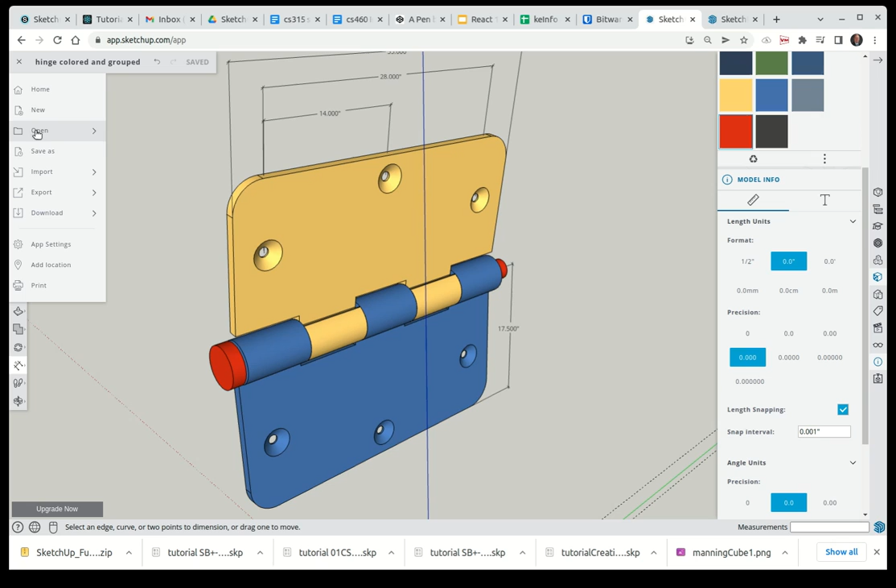So let's get started, I'm going to start completely from scratch. So, new, and I'm going to set my dimensions to be inches, precision of, let's go 3 decimal places, although I'm going to snap it at tenths of an inch. Does that sound right? Yeah, I think we can snap it at 1/10 of an inch. So it's not going to be perfect in English units, but tenths of an inch are easier to snap. I actually tried to snap to 1/32 of an inch, and it doesn't like that. Okay, so we have our units set.

I guess I can leave that open. Alright, we can get rid of our friend here. And let's draw the base using the rectangle tool. I can type R, I'll start at 0, and since I'm going to go tenths, I'm going to make it - and because of the way the accuracies of curves and things are going, I'm going to actually scale it up by tenths. I'm going to go 10/10 of an inch wide by 350 long.

Now I'm going to create the curve of the inner side of the hinge by first drawing a line, L, start there, and it's going to be - well, you know, the total width of the hinge as it's open is going to be 3.5 inches. So that would mean this height is going to be 1.5 inches, yeah, and then the round part of the hinge with a pin will be another 1/2 inch taking that up. So 150 high. Zoom out a bit.

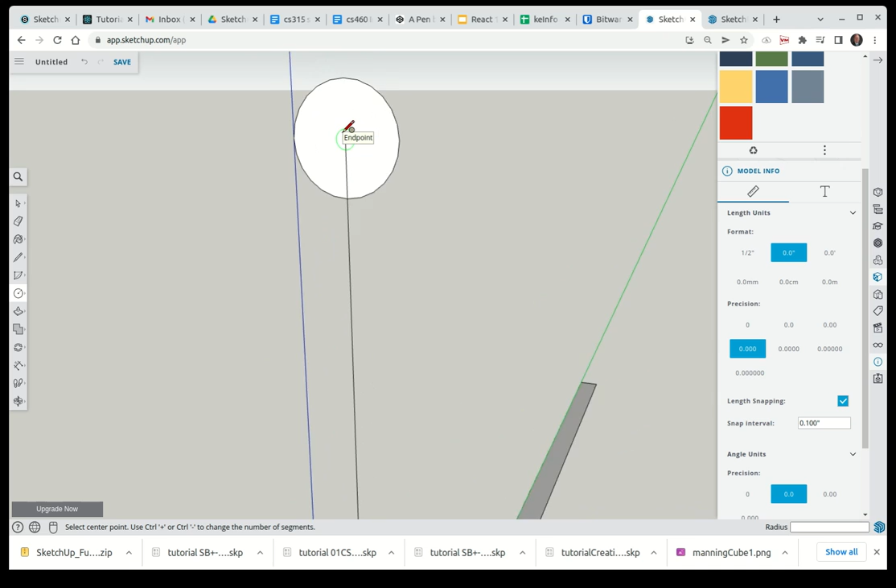Let's see, which of these lines should I erase? Now I want to follow a line. I'm going to go ahead and erase this line now because I don't need that center. I'll come back later, I'll need that center to create the pin.

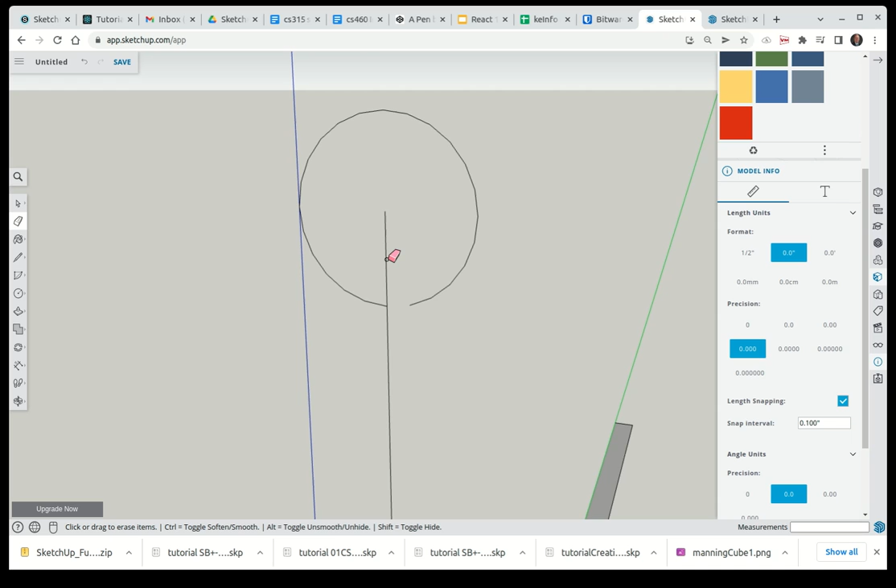But I don't like that curve right here, so I'm going to zoom in on that. I want to create a curve between these two lines to make it a little smoother. So let's go to the arc tool. Notice there's multiple ways to make an arc.

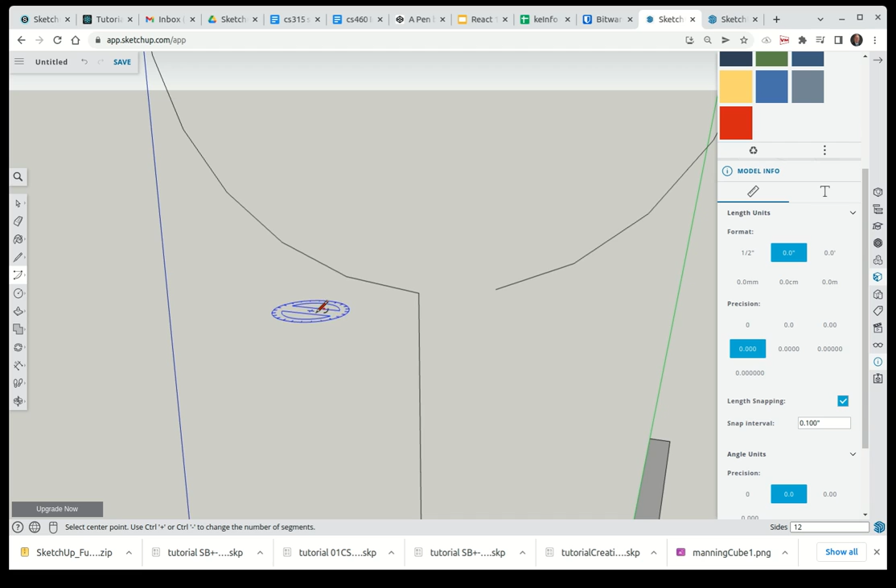I'm going to try the simplest way. Let's try that, what should I do? Let's try that, and then come down to here and along that edge. Oh, it didn't work out, let's try that again. Am I doing the right one? I think maybe let's try that one instead. There we go, that's the one I want.

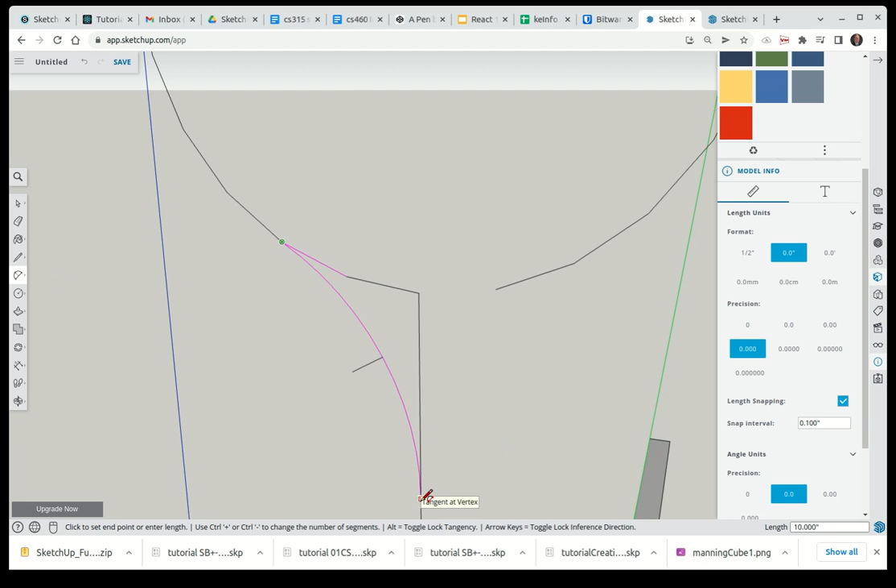Right there, see how I get a tangent at the vertex? I'd like a tangent at the vertex. Click. Now, if I hadn't scaled this up, it would not have allowed me to do that.

So I'm going to hit my eraser tool and get rid of these. This is going to be the line that my face will follow.

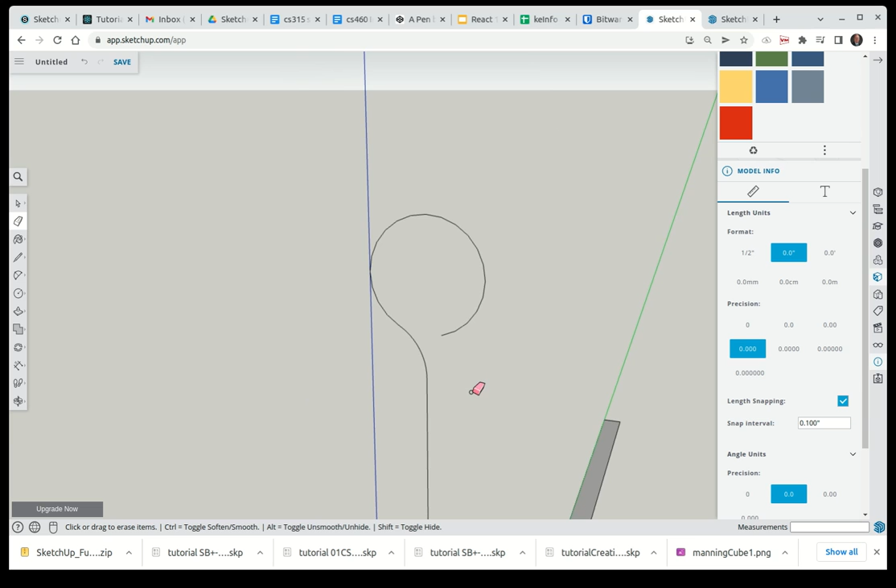Now I just realized that, like I told you at the start, I want to make pieces. This is going to be 350 long initially, but I want to make this only 70 long initially because there's 5 sections to make it 3.5 inches. So 70 times 5 sections will get 350 total. I'm going to follow this line with this face, but let's adjust that face here.

See if I can do this. Actually, let's just redraw that rectangle, it's easier. I'm just going to erase that rectangle. Let's do the selection tool, and then let's just erase that.

And let's just redraw a 10 by 70 rectangle. Don't need extra lines laying around. So let's do a rectangle. Start there, make it 10, 70, not 350... 70.

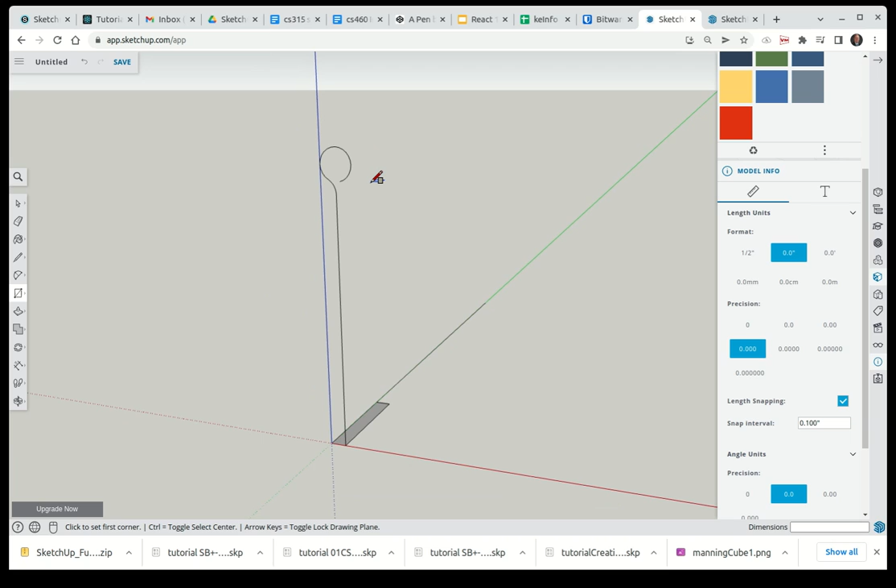Okay, now let's follow that face. This will become one section of our hinge, using the Follow Me tool. Wonderful, powerful tool, I hit F.

Oh, but that section is offset. I want the Follow Me. Select this face and drag up the line. Continue dragging, and look at that, we have a lovely Followed Me along that curve.

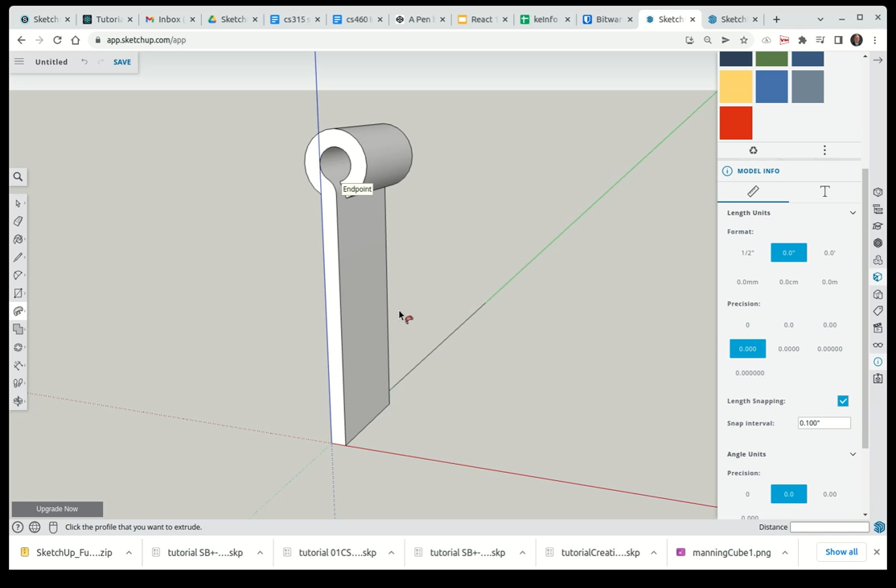Now that looks pretty good, but since we're going to be duplicating this piece, we can spend time on this piece. Let's fancy this up a bit, let's round this corner a bit.

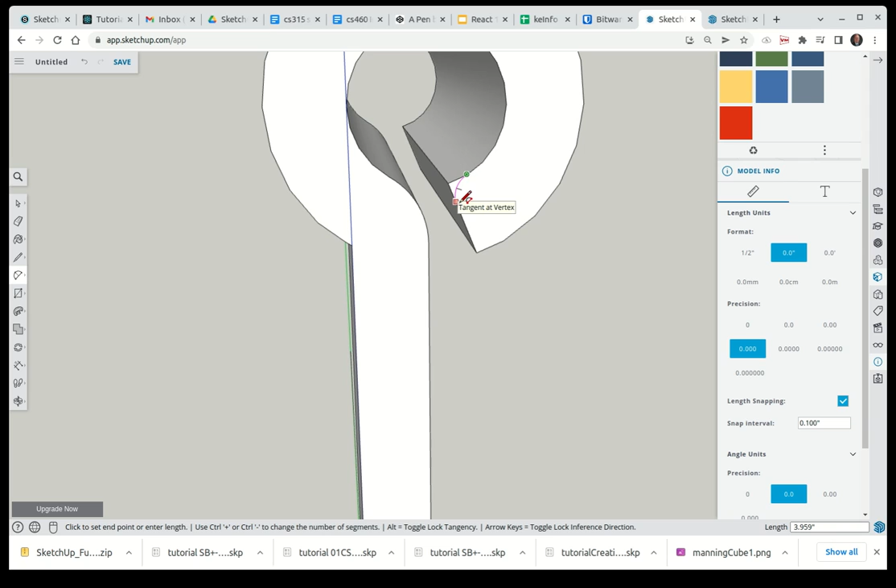Let's do that same arc tool, and let's do a little bit of an arc here. There, see when it turns purple, I have a nice tangent. Now let's push this face to the other side. Push anywhere in that other edge point, and done.

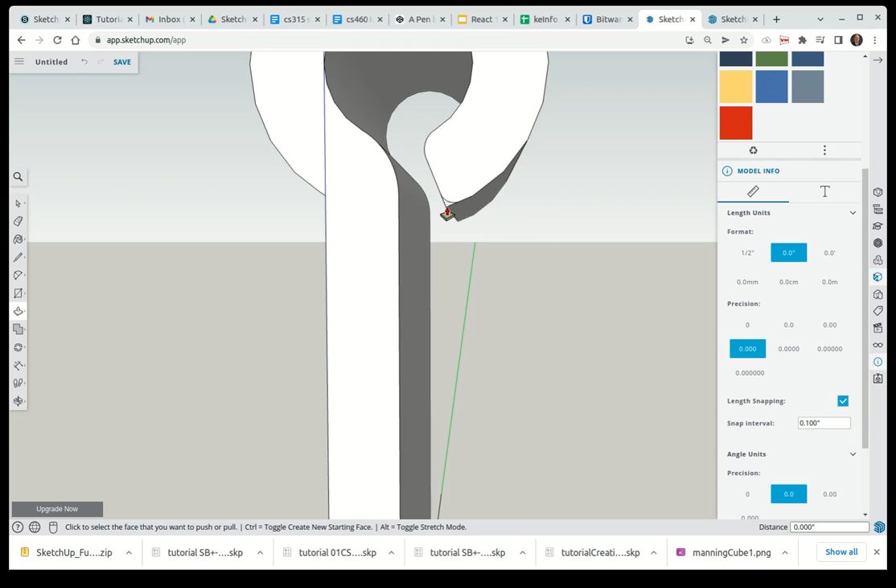Nicely rounded, let's do the same thing on that. First, draw an arc. Select that, that's a nice endpoint there. Now wait till I get to purple, snap to the tangent. Oops. Click. And push that face all the way to the other end. There.

They're a little nicer looking now. I could chamfer other edges, but we'll worry about that later. So now I have a piece of a hinge that I'm going to be duplicating and then drilling holes in.

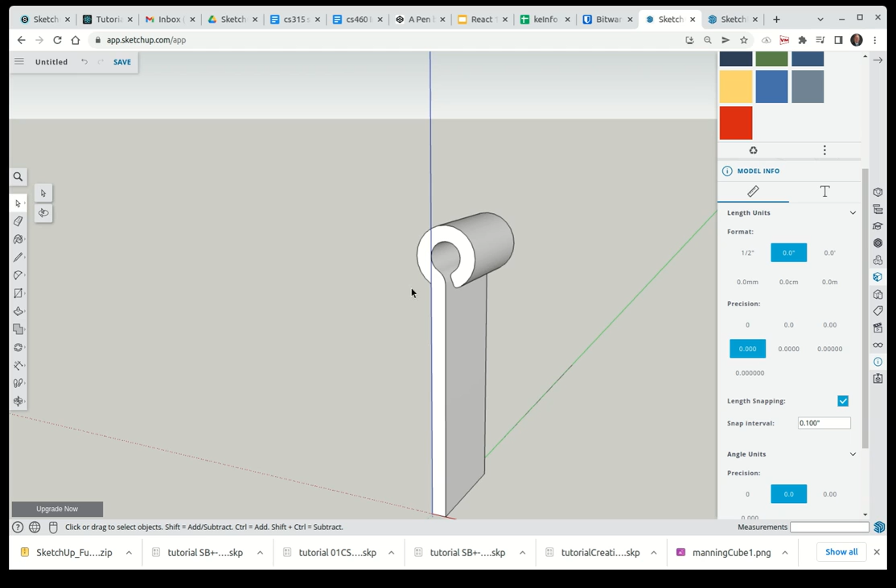Now, the best thing to do now is to select, triple click select, and group it.

Uh-oh, there's a line in there that I don't want. I'm going to zoom in and get rid of it, and it will reduce the size of my object here. I can triple click, yeah, there's that extra line hanging around. I can delete that line. There we go, now my group is a reduced size.

I can always come back here and adjust this just by double clicking on it, and make adjustments to this specific group. I could also make this a component, and wherever that component appears, if I ever edit it, that component will be changed everywhere.

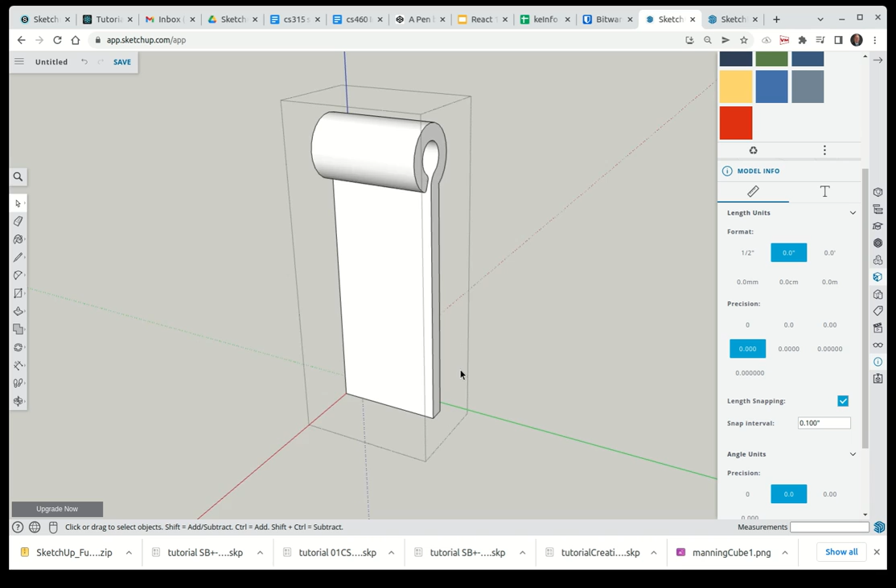Now eventually this one is going to want to have a rounded edge, but the other ones aren't, so I'm not going to round the edge or drill any holes yet. I'm going to get my hinge pieces all produced.

So I'll unclick that. Now what I want to do is duplicate this. If I move it down 70, it'll be just connected to this one. I want to move it down another 70.

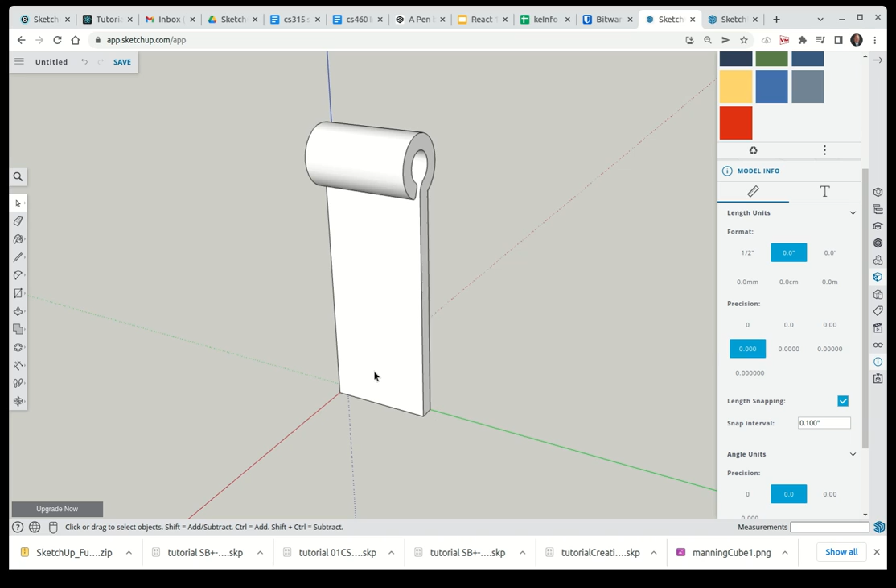To 140. So I select it as a group, type move, and pick the point—since I know the direction, it doesn't matter which point, but I make a habit of selecting corners when moving. Now as I move it, it automatically wants to follow along the edge.

But if I want to duplicate rather than move it, I hit the Control key. Now I'm moving it, and see how it's following the green axis? I like that. I could lock it to the green axis, or just be happy it's following now.

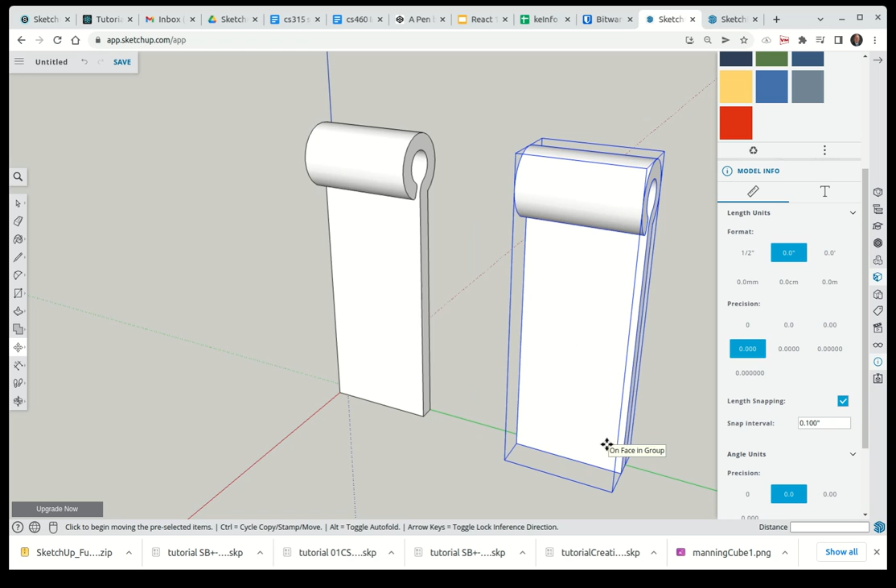I can type 140 to be the distance it moves. Now I'm going to make another move on this one just to practice. Click, start down this direction, Control key so it's a duplicate, and another 140. And that's the other end of this hinge.

We're going to fill these in very easily later, after drilling holes and things in this one.

Now let's get the other section of our hinge. I guess we can offset it this way so we can be duplicating those other parts as well, and then we'll rotate it. So let's go ahead and make the other section.

I'll go ahead and select this one. Oh, I don't want that one. Escape. Let's select this one, move that corner, and Control.

This is going to eventually be rotated around for the top. Actually, we're going to flip it 180 degrees for the other side of the hinge. So I'll move it out far enough so it doesn't get in my way. Click.

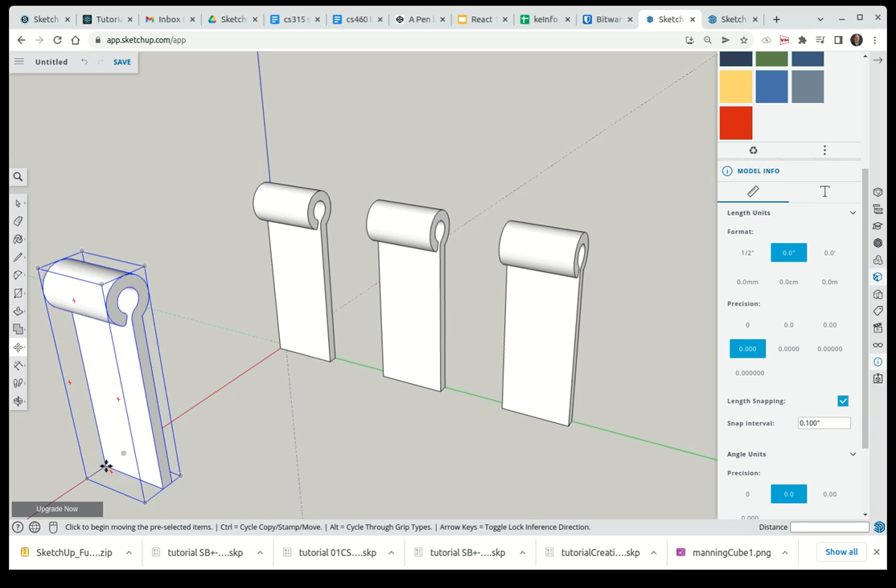And now let's move this one again, this direction, 70. Okay, so that's the other hinge.

We're going to also rotate this. Let's go ahead and rotate it now, and then we'll match this.

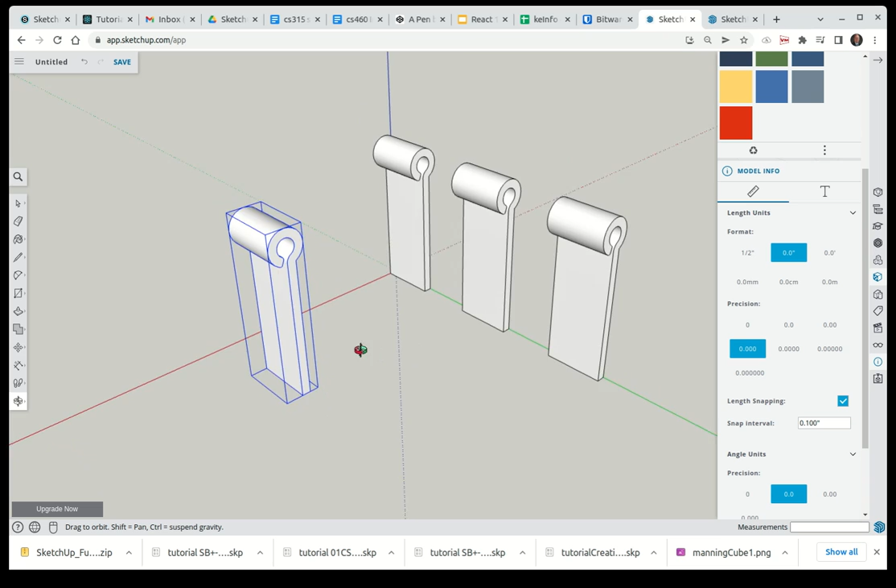Let's see. Now to rotate it, I want to be careful because I want to rotate it on the midpoint of the bottom part of this, so it actually will still fit when I slide it back over there. So let's go ahead and rotate this using the Q key.

The rotation point is going to be that midpoint, but I want to make sure I'm choosing the right plane first. So let's lock it—here we go, up arrow key locks it to that plane of rotation. I want to choose that midpoint on that face to be the rotation point.

Click. This is my initial angle, and now click again to have rotated 180 degrees exactly on the midpoint. Now I can move this guy over, and it'll be matching that space there.

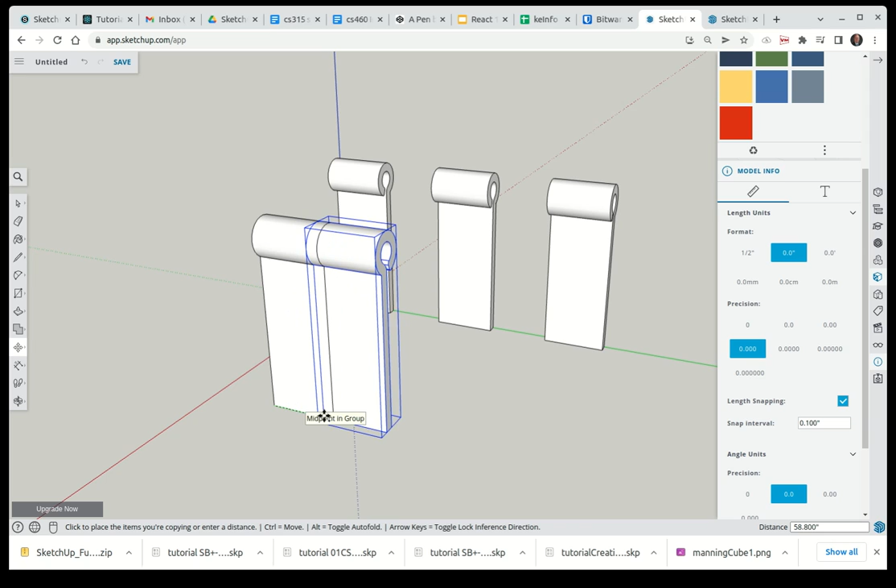So let's do another move. M, click that point, come this direction, Control key to duplicate, and it's going to move 140. There we go. Now I have the matching face of the hinge.

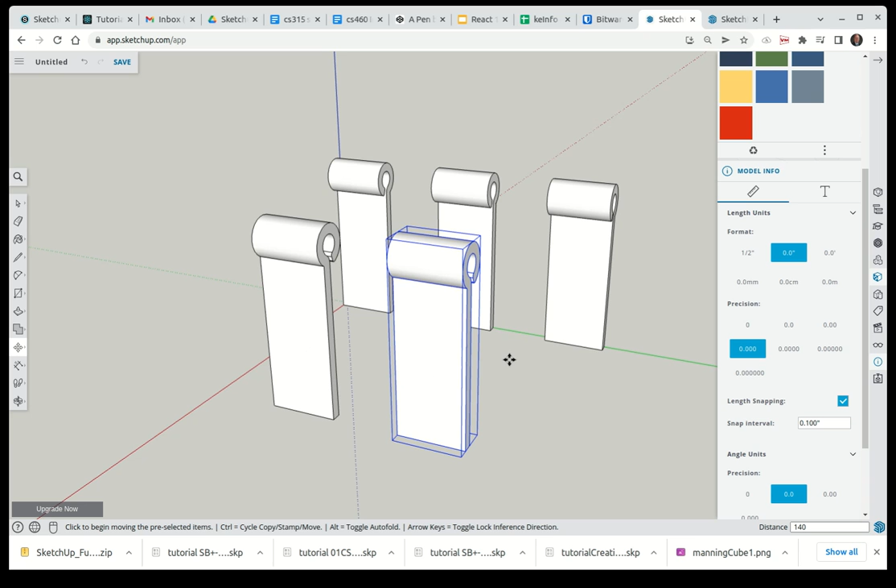Now I can easily come and fill the other remaining parts in. On this side, I will need to be drilling holes in them. On this side, there are no holes needed to be drilled. But let's drill our holes now in these parts.

Now, in order to drill holes, I have looked at hinges, and I've seen that they do need a little bit of clearance, and I might as well draw a line there. Do I have any reference points for a line?

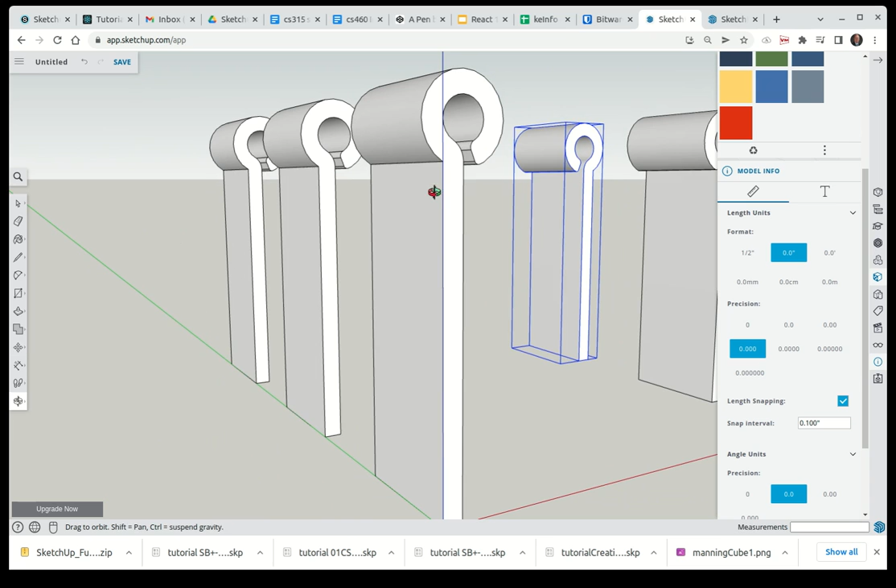I don't want to draw a line across there. I guess I'm just going to have to pick a line to draw across. That'll become my reference line, and I need to make sure it follows all of them. So let's go ahead and draw a line, and let's pick some reasonable clearance.

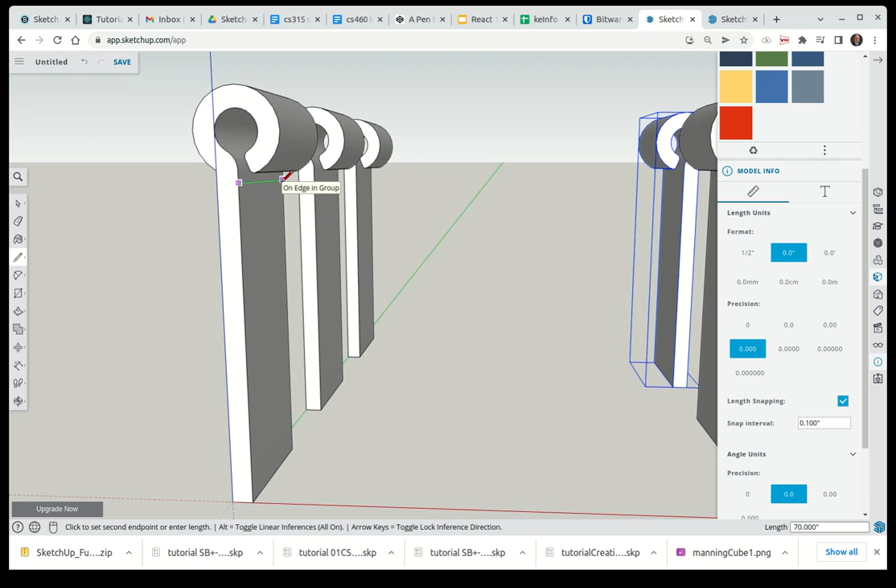About there is probably pretty good, and it automatically wants to follow the green axis. Snap there. Now I want a midpoint reference, L, and come down here. This is just a reference line I'll be deleting later. This will be my reference point for my holes drilled.

Now I realize the hole is going to be in the same location as this one over here, so I'm going to get the hole drilled in this one and then duplicate this. I'll be deleting this guy.

So now what I need to do is have a reference for where the hole is here. It's going to be 3/4 of the way here. So let's select this line and divide it into 4 sections and type 4.

Now you can't tell, but if I hover along there, I'll see when I go to draw a circle, it will discover there's an endpoint there. Now this is where I was making the circles too small. I'm going to make the main inner drill hole.

Let's make it... it looks like about 10 tenths of an inch. Does that sound right? That looks about right. Let's go 10.

Okay, that's the hole. Now this guy here, I need a similar guide to be basically centered. Oh, I did that wrong. This one is 3/4 inch down. This one is in the center. There's a... and at 10. That's that hole. This one needs to be 3/4 inch down.

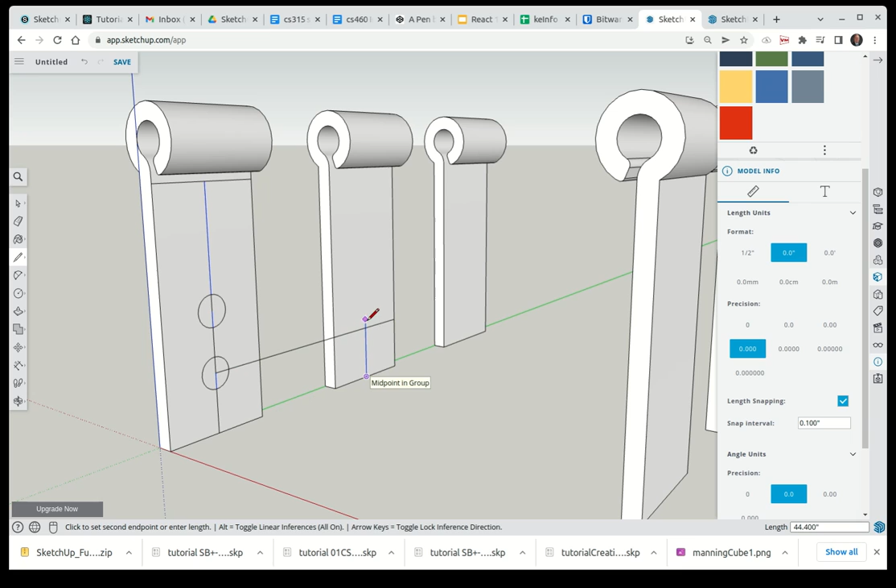So let's go ahead and draw another reference line across here. And let's see, I need another reference line from the midpoint up to there. That'll be my center for that hole. This one is out, this one is halfway. So let's do that circle.

C out at 10. Okay, now let's get rid of the extra lines, and then we'll push that through, and we'll also countersink it. So stop drawing lines. Let's go ahead and select and start erasing some extra lines.

So I forgot, this one doesn't need to be here. Let's erase lines first. Then when we erase the circle, it'll be one click. Oops, didn't mean to do that. Just the line, erase some reference lines.

If you don't erase the reference lines, when you push a circle, your circle will actually have sections, and I don't like sections.

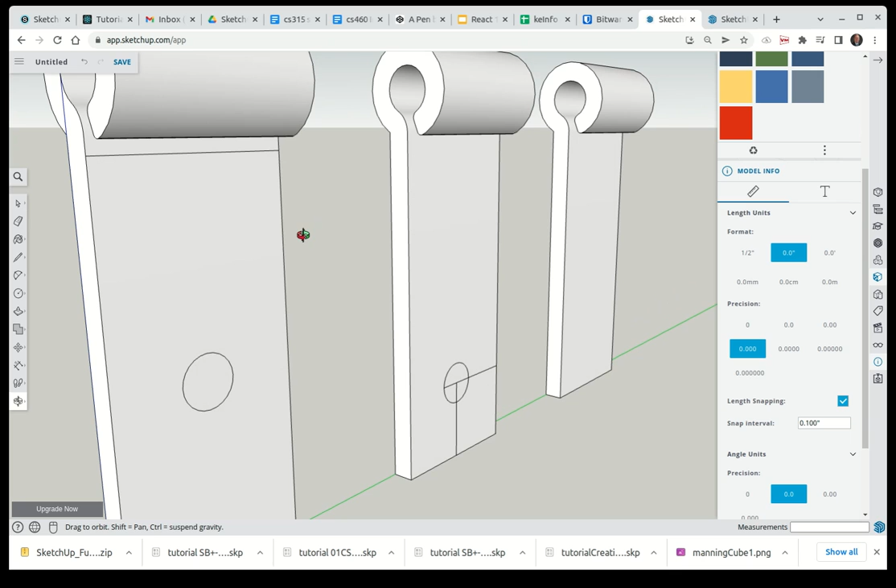I'm on the group. I'll leave that line there for now, because I'm going to be pulling that section in between. Alright, let's go ahead and delete the lines first, and then we'll drill the circle. Drill the hole.

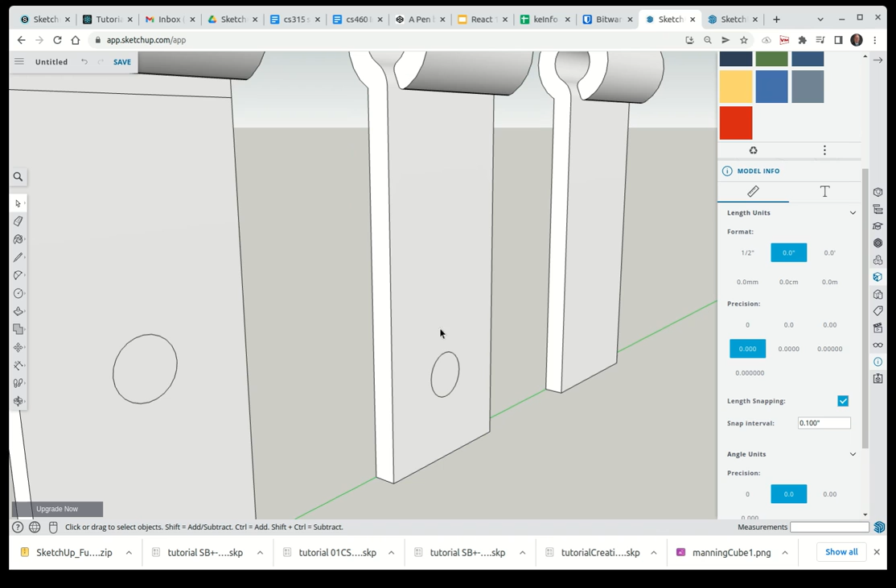Okay, so we're here. We want this to be a hole drilled in this object. But remember, this is an object. I'm going to explode that. Now, when I push this circle through, then I will regroup this into its own group, just because I like groups. It doesn't have to be a group now.

But remember, this is 10 across. I don't want it to go exactly 10 if I'm going to countersink. So I'm going to actually push this twice. I'm going to click, and push it in this direction.

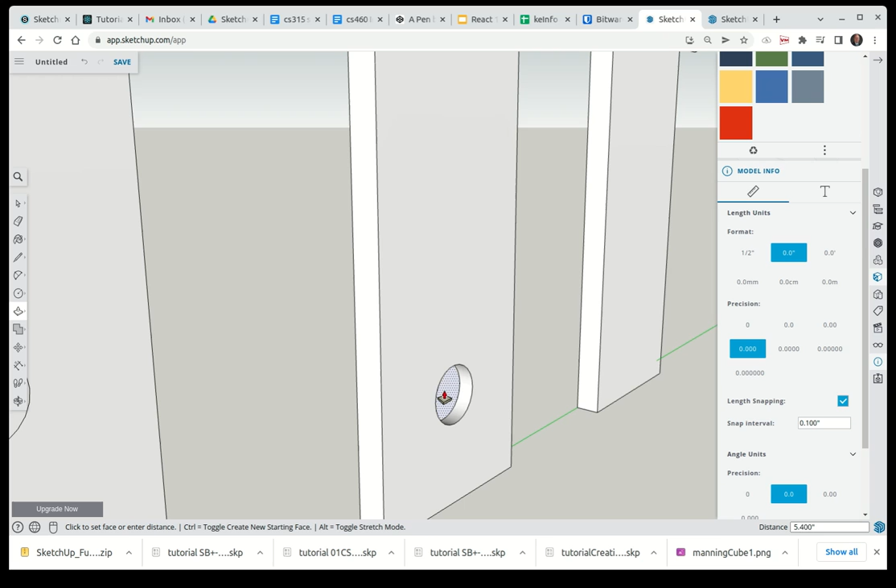Let's go 8. And now I'm going to push it the rest of the way. There's another 2 left. But I'm going to control and push, so it actually pushes a new surface, because this is going to be the reference point for the end of the countersink.

So I'll push that direction 2 this time. And now if I rotate around, I should see how the hole went all the way to the other end. And the advantage here is now I can delete that face, and now I have a hole, but I have an extra reference point.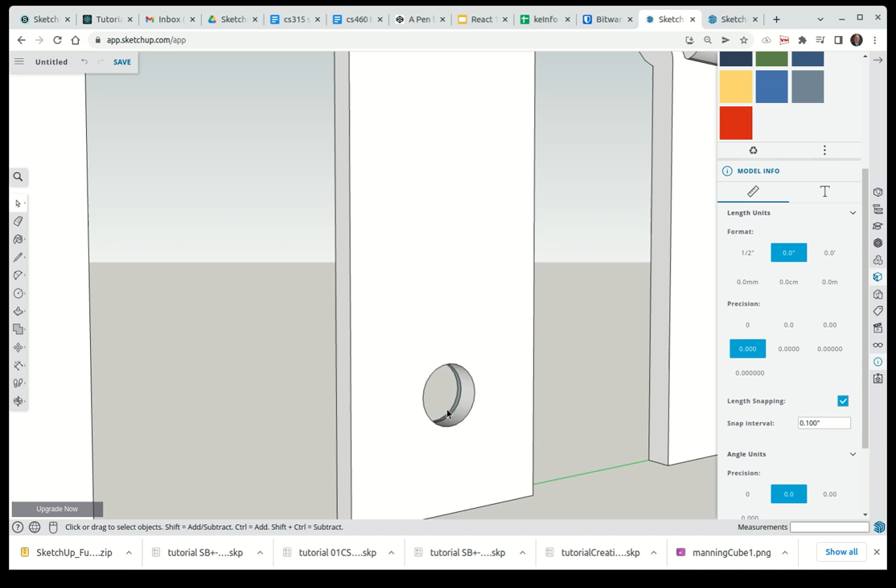It's 2/10, or 0.2 tenths in the final thing. Now what I want to do is countersink this. So what I want to do is actually scale this circle, right? Not that face. I want to scale that circle, but I want it scaled around the center.

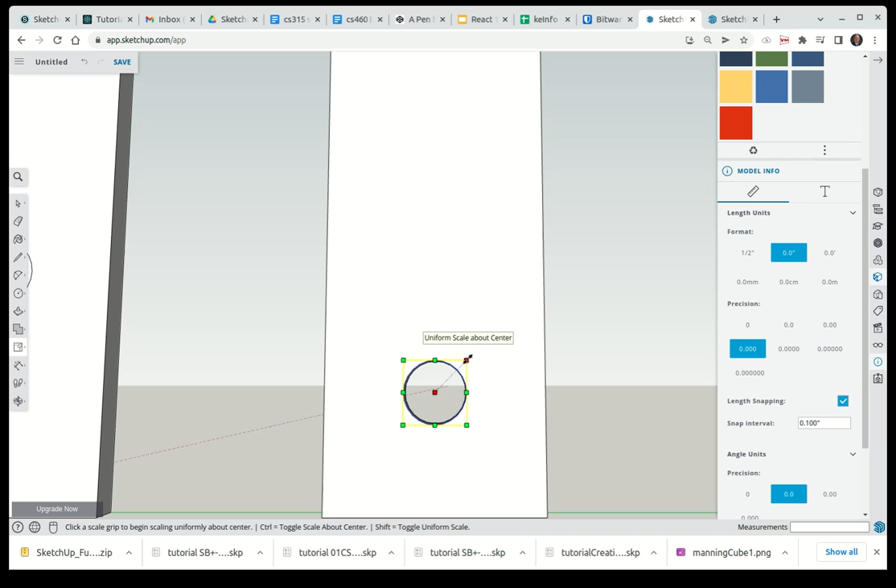Control key now makes the scaling choose to scale around the center, and watch what happens as I click and scale this. Now it's hard to tell when I'm at 45 degrees, but we can estimate that looks like it's snapping to what seems like a good 45 degrees. So I'm going to stop right there. Now let's see, that looks pretty well countersunk. Let's do that again over here on this one.

First, I'm going to push this face. Oh, wait a minute, I haven't exploded this group. Forgot to explode. Let's make sure we do our explode.

Now let's push that face this direction, 8. And now push it another 2. Oh, and see, since I didn't do the plus, it's not leaving one behind. So let's hit Control and push it another 2 in that direction.

Now we can start deleting faces by selecting, and I should see that extra edge there. Very important to have that extra edge.

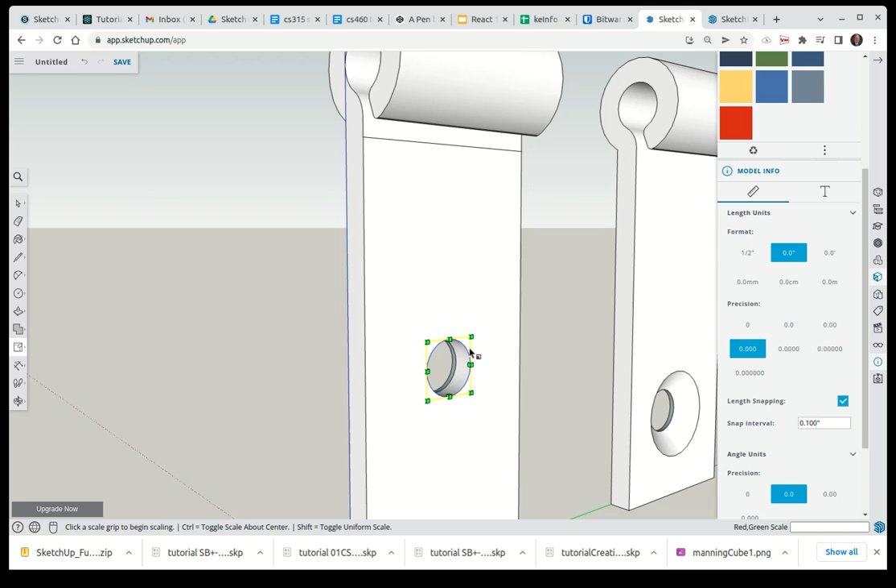Now let's select that circle and do a scale S, Control to center the scaling, and drag the corner out. Look at that, it snaps nicely what looks like the 45-degree countersink.

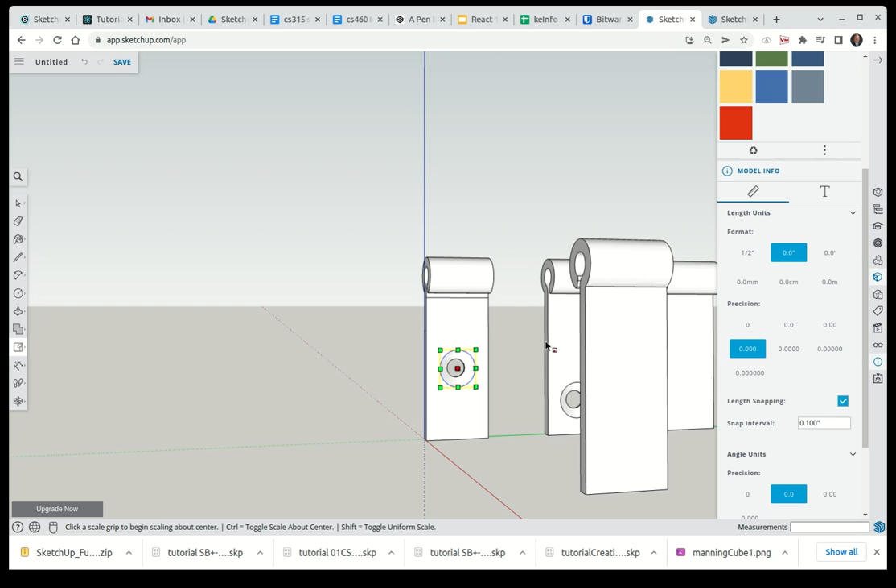Now this piece here, if I flip it, is what I want over here. So let's go ahead and see if I can duplicate that piece to fill it here. Then I will have saved me time from having to drill another hole. Let's see if we can do that.

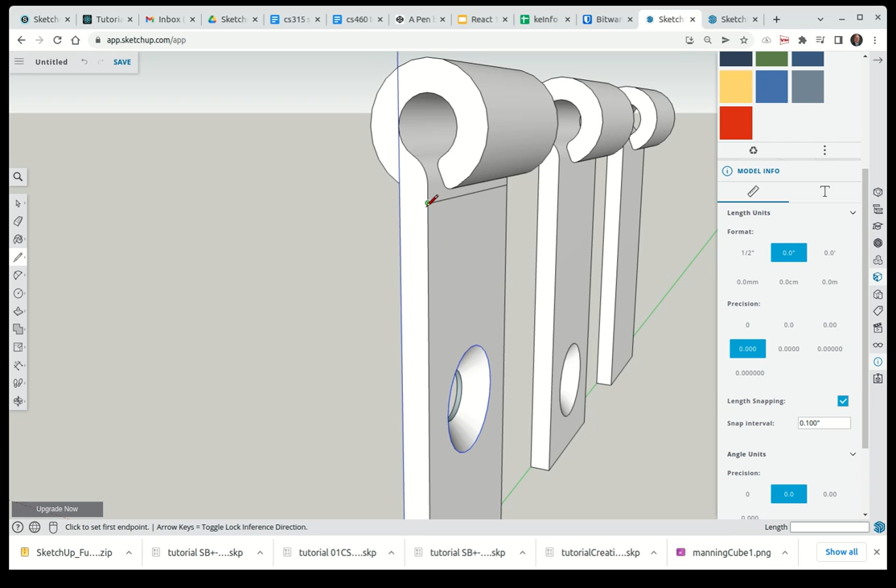In order to break this thing up, remember I've exploded it. To break this up into two parts, this be one part and this be another part I can duplicate. Let's go ahead and draw lines around there, or I could do a rectangle. Let's do lines.

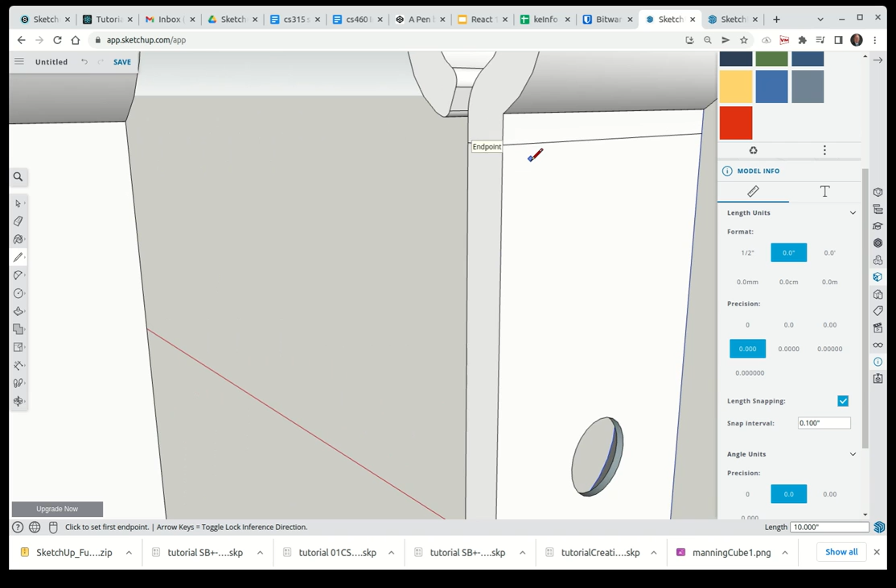Now let's see if I can select this, and let's make that a group, because this will be handy to put over here. This whole thing will be duplicated over to there, and then this piece I can put to the other side of the hinge and rotate it. Let's see if I can do that.

First of all, select. Let's try. Let's see here, if I do this just right, I should get that piece selected and see if I can make it a group. Look at that. Let's go ahead and group that.

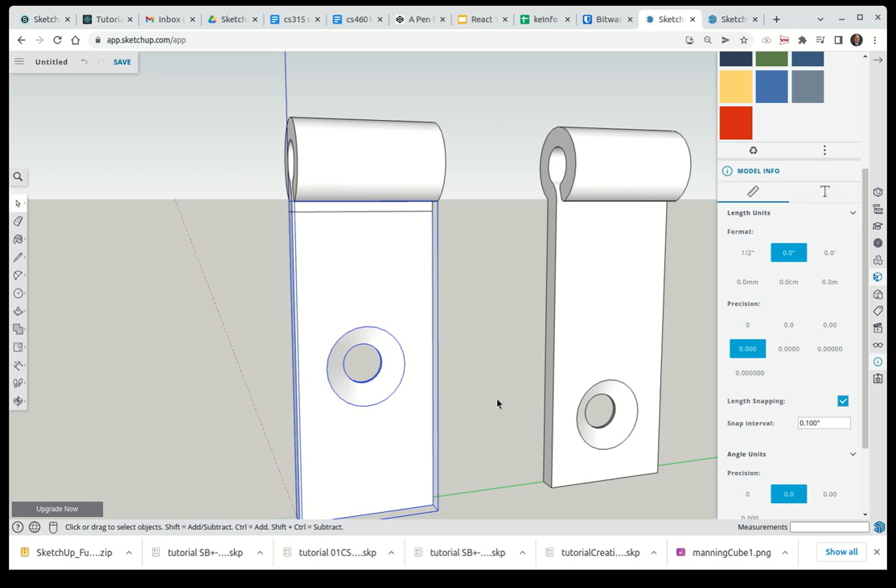And now, let's see, did it do the right thing? Let's see what happens. I may have grabbed too much. Let's try that again. Let's go back and explode that.

Let's try grouping just the right stuff here. Try that. Let's group that. Group. That looks a little better. Oh, that's the reference line. That had me fooled. Alright, so let's go ahead and move that over here.

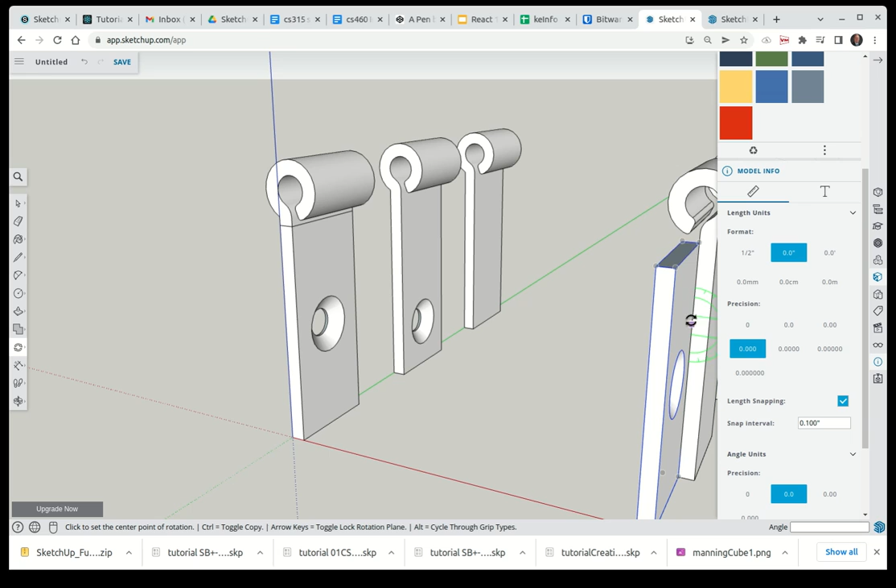And then we'll flip it. So let's do M. Click that corner right there. Control key, so I'm making a duplicate of it, and have it jump right there. And now we're going to rotate this guy. Let's do a Q on the midpoint right there, along that x-axis, and look at that. I've got that end ready to go.

Now I can move this down to here. Let's go ahead and do another move, and we'll select this corner, and this is a good time, Control, because I want that corner to match exactly there. Look at that. I've got that piece there.

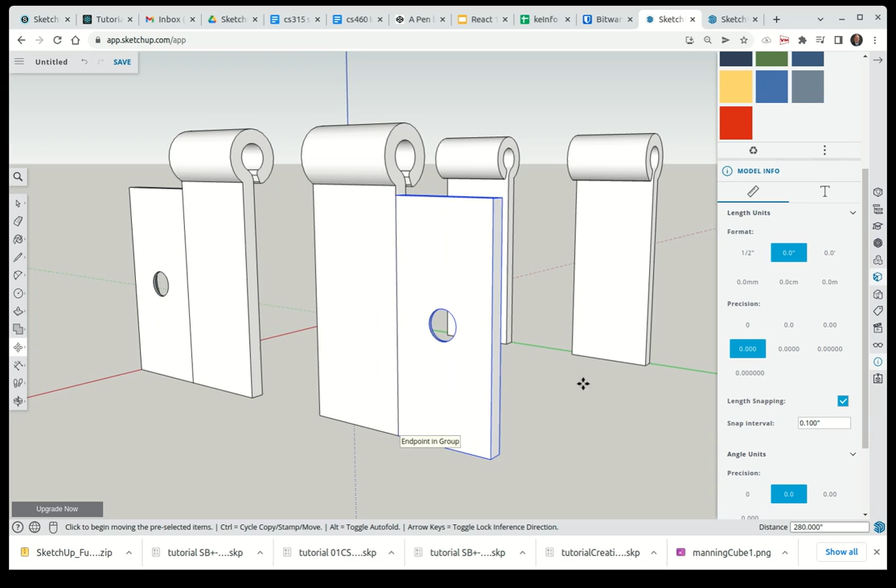Alright, now I'm just about done. I think I'll just move that and remove the hole. It's easy to remove a hole. Watch how easy this is. Select that M, select that corner, Control key, match that endpoint.

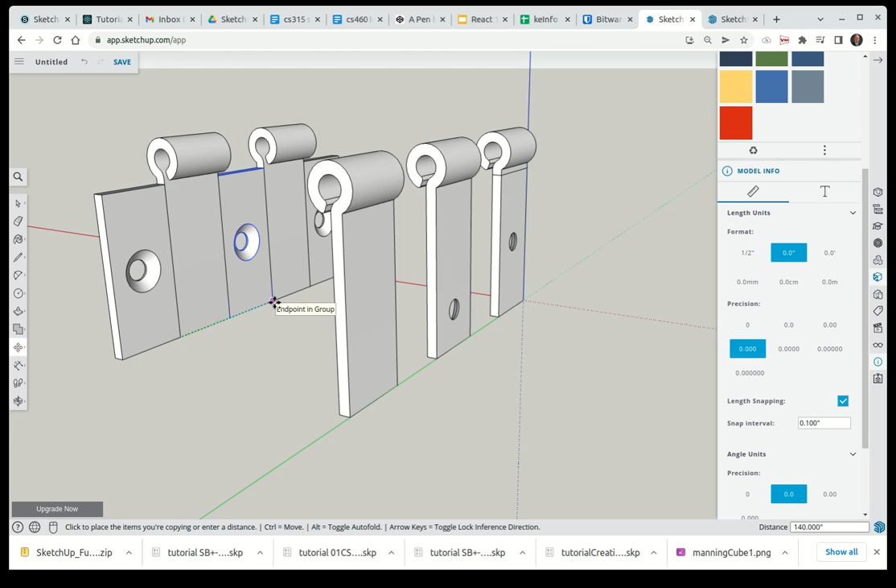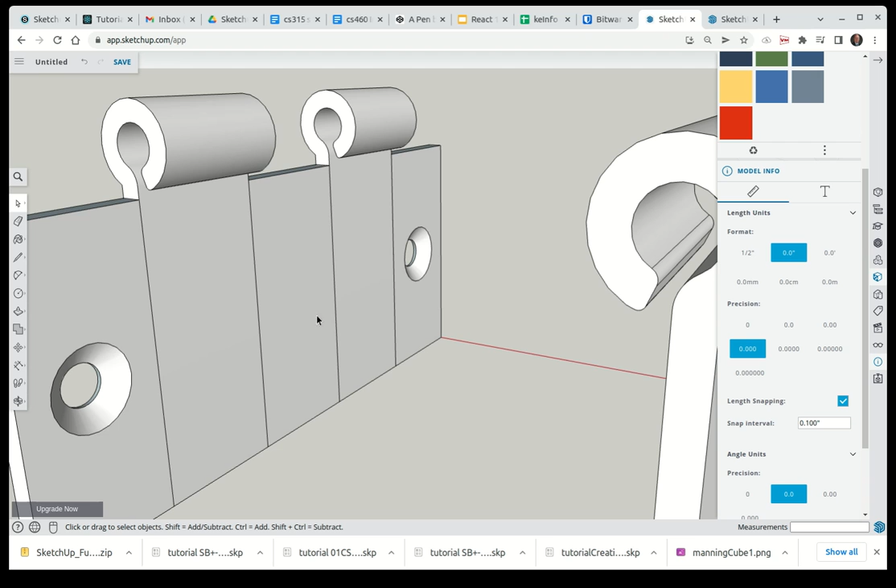And let's go ahead and select, and explode. And now we want to delete that hole just by deleting that circle. And let's go to the other end, the other side of it, and select that circle and delete. Now to be thorough, you could delete that inner circle first, just so you don't have extra things left on the inside. Look at how easy it is to delete a circle.

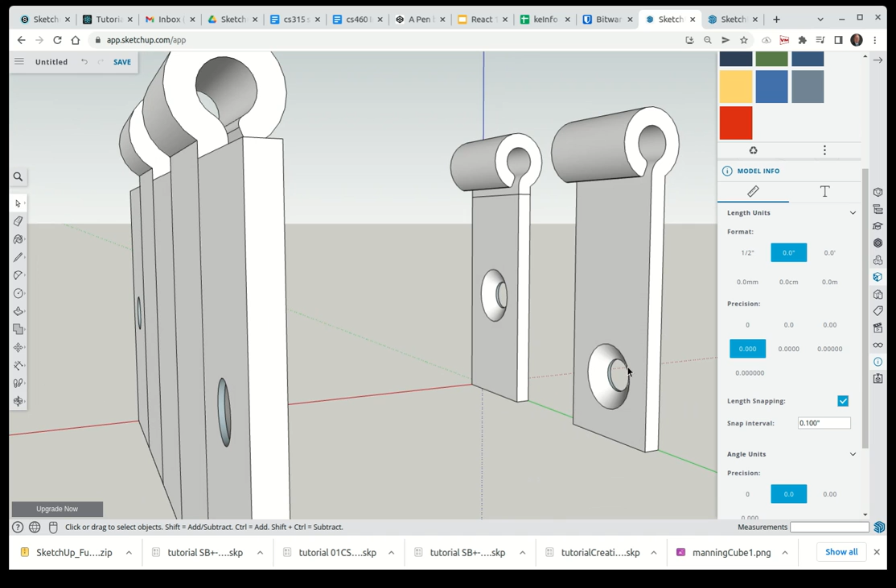Alright, now I want this. Oh, I forgot about that hole. Let's do the same thing. I forgot that. Let's go ahead and delete that. I forgot that we want to duplicate this guy because he has a hole drilled for us already.

I want to exactly match the hole. So let's go ahead and do our line references along the edge.

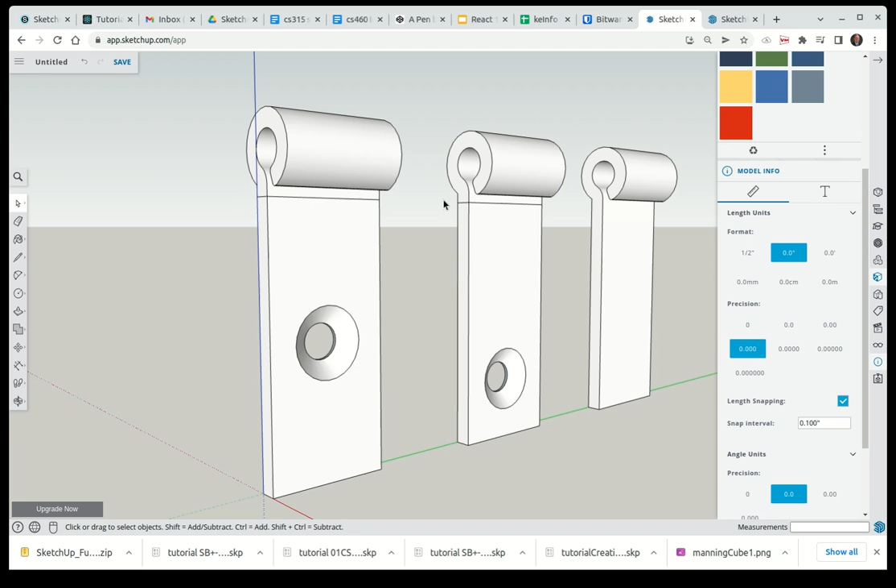Now if I want to group that, I have to be very careful to not select the wrong things. Get rid of that line there. Let's be careful exactly what we group. There we go. And make that a group. And now, zoom out a little bit. Let's get rid of a few extra lines here.

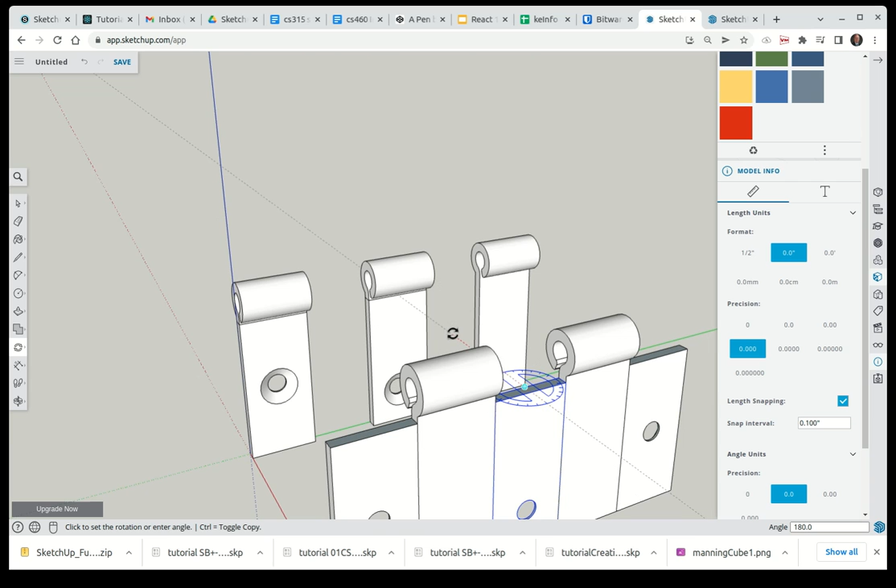Let's go ahead and select that and move, and we will choose that corner, Control key, match that corner. Now let's rotate it with the Q, choose that midpoint, x-axis, and rotate around on the x-axis. There we go. And now we have our faces.

This basically is a duplicate of this, so I can select that and delete it. And let's go ahead and make this whole thing a group and move that down the y-axis, is it?

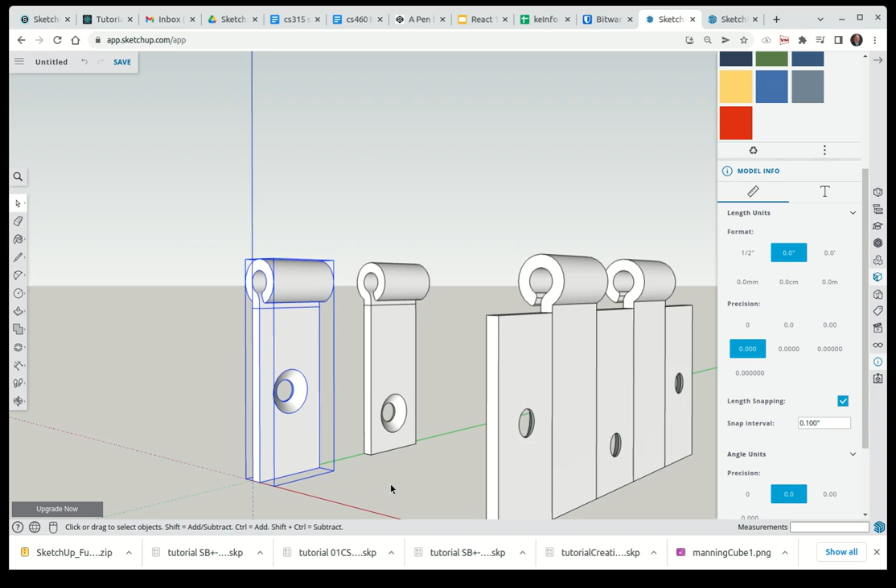140. So I'll move any point there along the y-axis, Control key, and 140. Is it 140? That's 140. I guess it would be 350. Oh, 280. There we go.

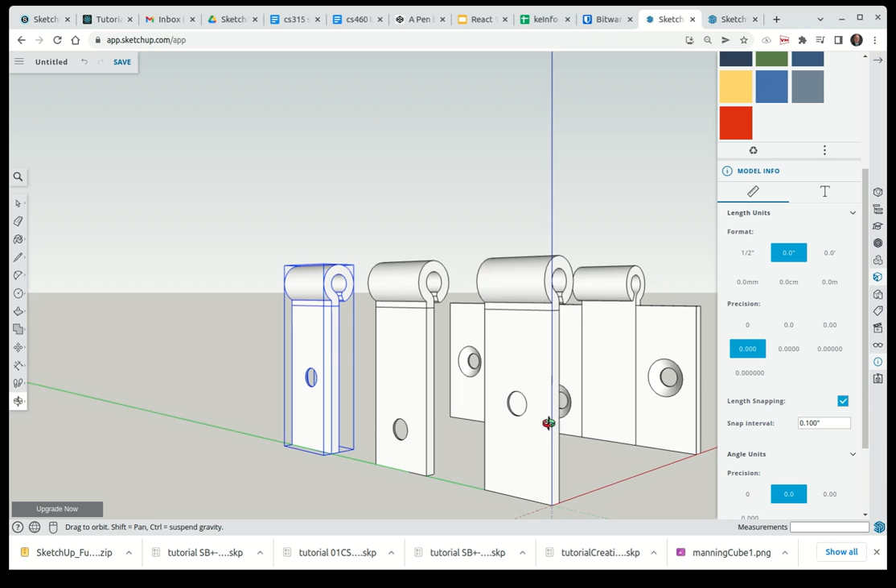Alright, now we need a solid rectangle in between those. So I can make a duplicate of this, move it over here, and then remove the hole. We'll move it over here, remove a hole, and then move it again. So select that.

Oh, I forgot to group it. Let's group. Oh, it is grouped. Let's try that. Let's do a move, and move this way, and Control key. I'll exactly move it to there.

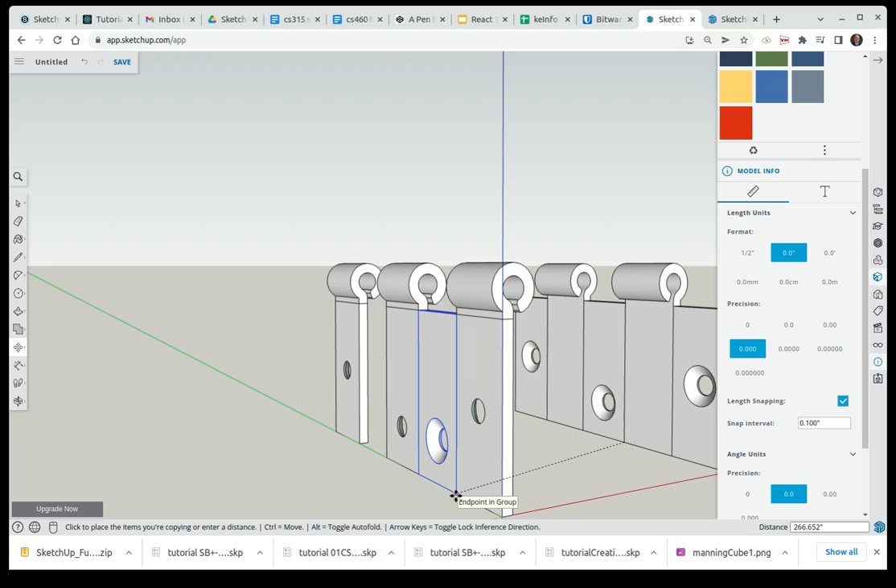Let's now remove the hole. Triple click. Remove the little circle. Let's move that circle there. We'll remove that circle, and then let's remove that circle. There we go. I can do it all from one side.

Select, move, click, Control, match there. Alright, so I have a lovely hinge. This part we can always slide over and rotate around.

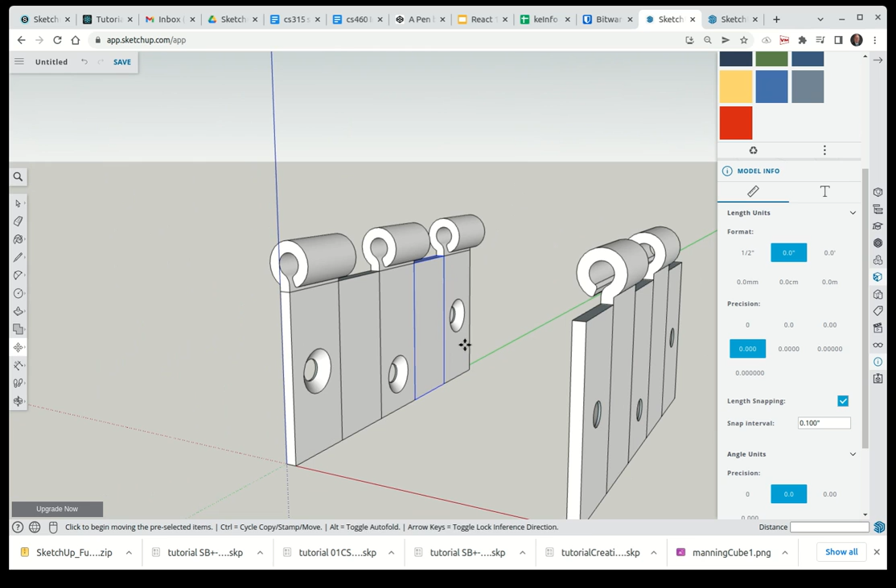Let's chamfer our edges now. I think I want a 1/2 inch radius. So let's mark our, actually let's do half the radius, whatever the midpoint is. Let's see, how am I going to know how far that is? Well, I know it's 35. I suppose I could do a 35 long line, and that would be the center point of my radius.

Let's do that. Now, the reason I'm making these marks is because of the way I need to do the chamfering, or the rounding of that corner. So let's do a line, midpoint, and I know I need to come up 35, that's half the width of that little section, 35. Now let's do an arc, and I'm using this version because I figured out that's the easiest way to get a nice radius. And now I can use the push tool, push that surface.

Oh, forgot to explode this part. There, now push the surface. Oh, let's try that again. Thought I had exploded. There we go. Didn't know why. Alright, now let's push this surface. There we go, and I can push it to that end, and that rounds that corner.

Isn't that lovely? But I have to get rid of those extra lines, they just were my reference lines. Now I tried using a tape measure. Oh, I don't want to remove that line. If I accidentally delete that line, look what happens. I lose that surface. I don't want to delete that line. I do want to delete that line.

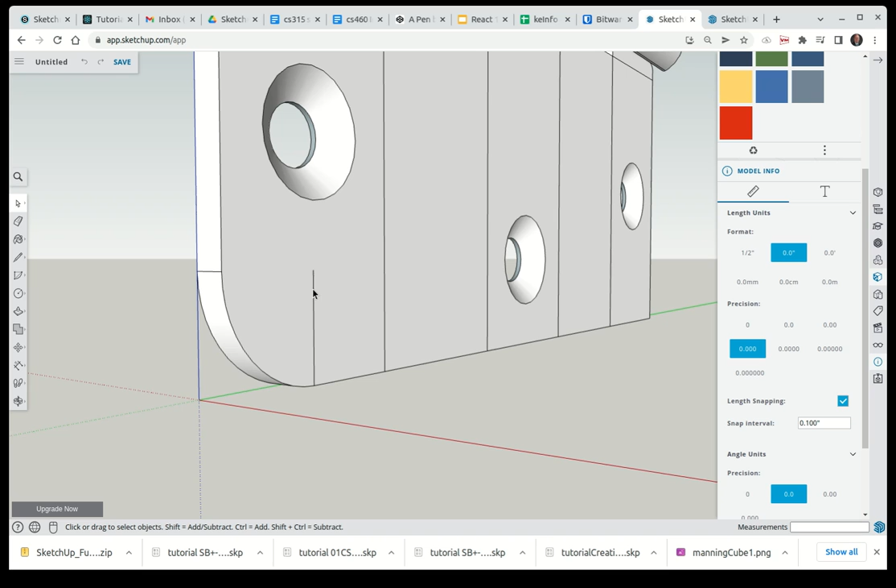Let's do that same thing down here. Oh, zoom out a little bit. As I rotate around, I get a good view of it. Now let's do that same thing over here. So, well, let's try the tape measure. Watch what happens. I think actually, since I'm using the endpoint, the tape measure will work.

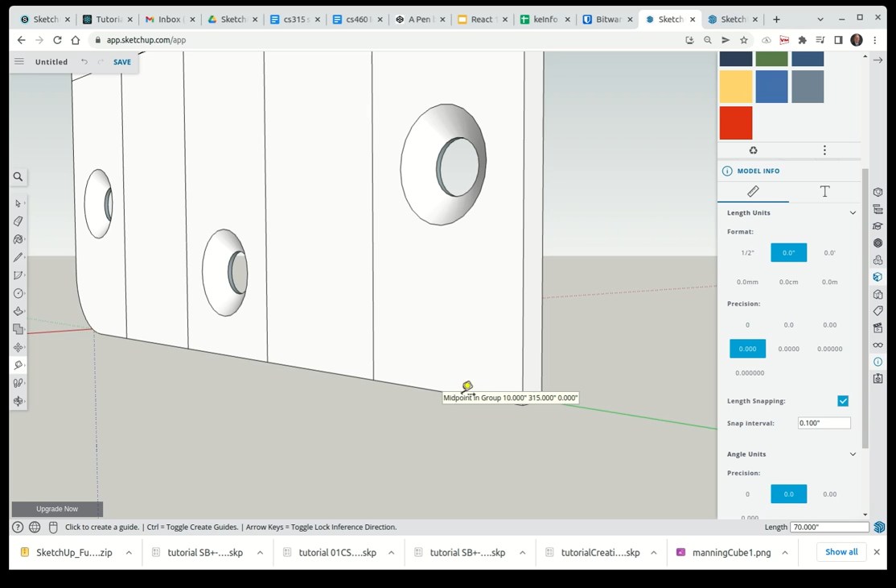T for tape measure. Start at the midpoint. Come up 35. There. And now I have a little point there that I can use for reference. Now it doesn't leave a line there, but it still leaves the annoying measurement line around, which I really don't want.

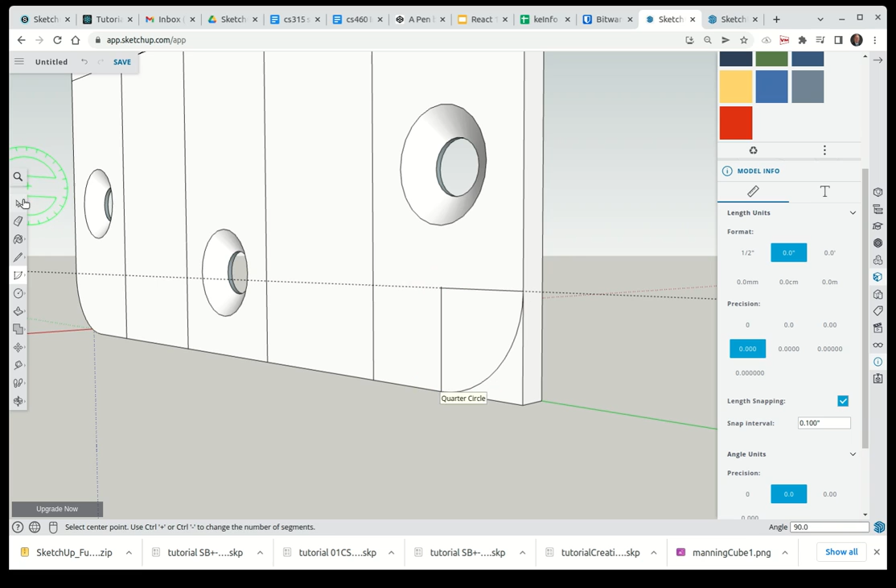So let's do an arc, again the pie-shaped arc. There's our center, there's the start of the arc, there's the end of the arc. And again, I forgot to explode that, so explode. Oh, that's right, I had to explode twice, remember, because it had a group, and then the top hinge part was also a group. Now let's explode that again.

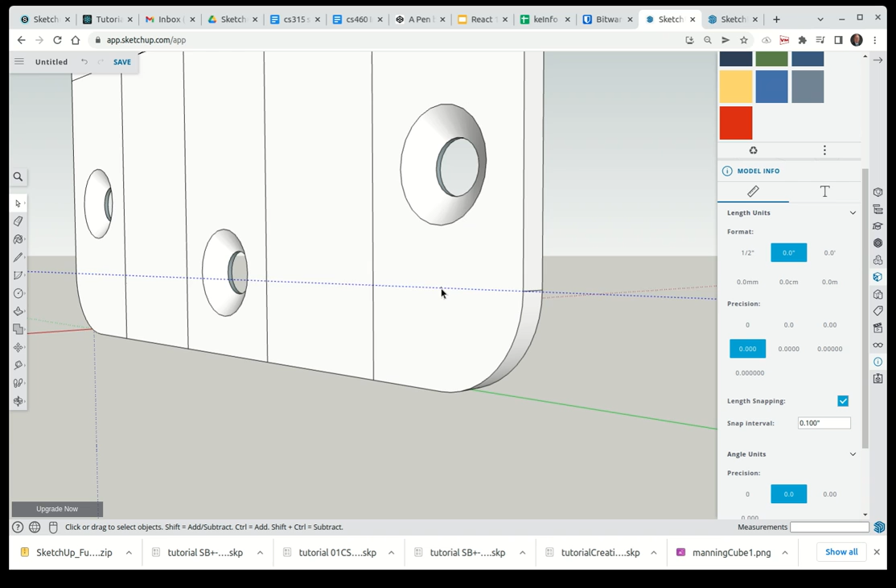Now I can push that face through to the other side, and now I can come back and delete lines. So it still leaves that line there, but my reference point is now a tape measure point instead of a line. I can click on that there and delete the tape measure reference point. Rounded corners.

Now to make these faces one, I can come here now, I can select the entire thing and make sure to explode that whole thing. And now I can come in here and delete these individual lines, and this becomes one part.

Don't have the annoying lines. I can get rid of lots of lines. If you leave them, it's not going to break it, but to clean it up, you can clean out these extra lines. Remember, don't want to delete those. Clean out some extras that just ended up being reference lines.

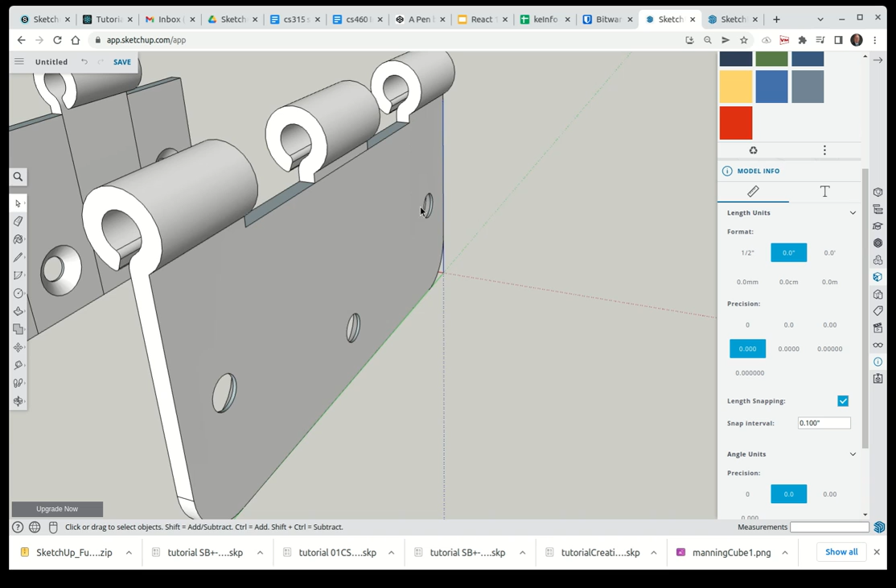Oops, and it looks lovely. And if I want, I can paint this part. Let's make it a group first, and then we'll paint it. So let's select it all. Oops. And let's make it a group.

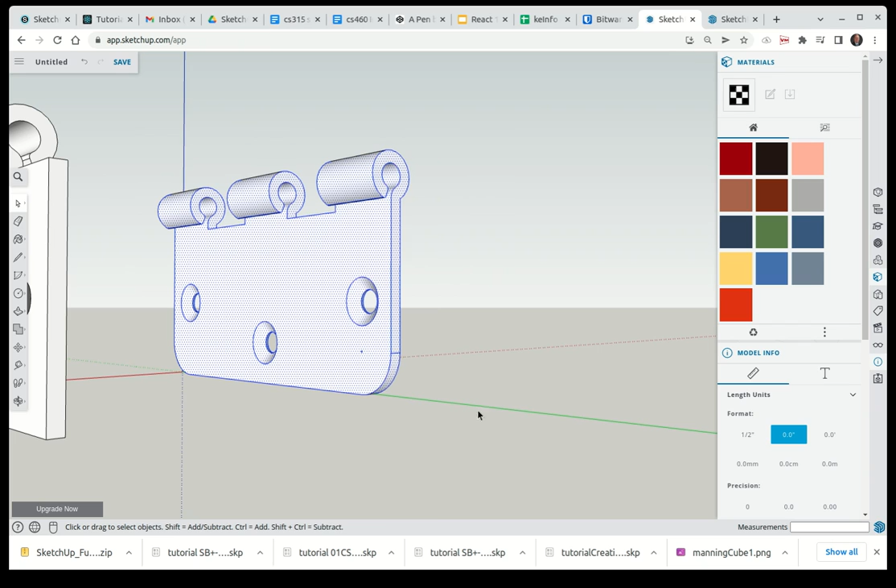And I can even make it a component now. And if I make it a component and use it somewhere else, if I ever modify it, wherever I'm using it will be modified. Now the holes are a little better. I think it's a little thicker than an actual real hinge.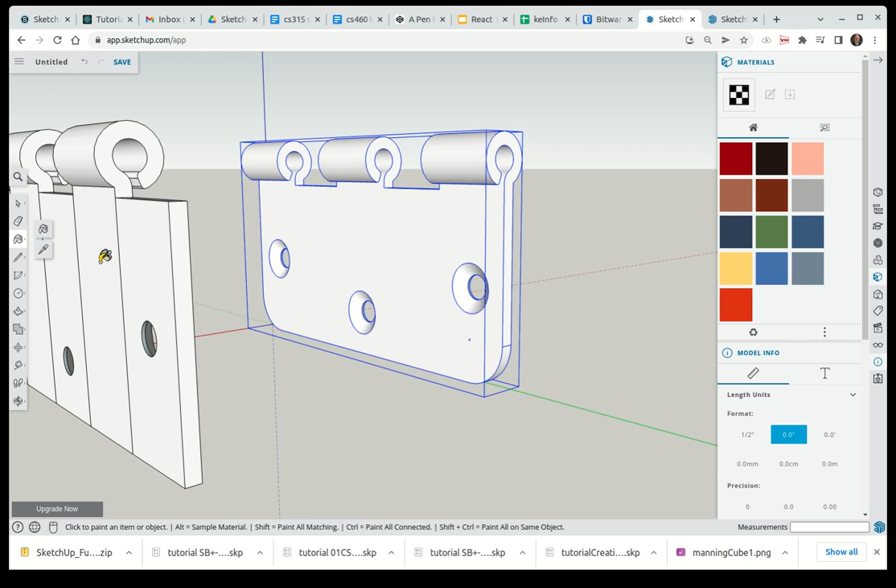But let's go ahead and paint that a nice lovely color. Yellow. Now let's do the same thing for this one.

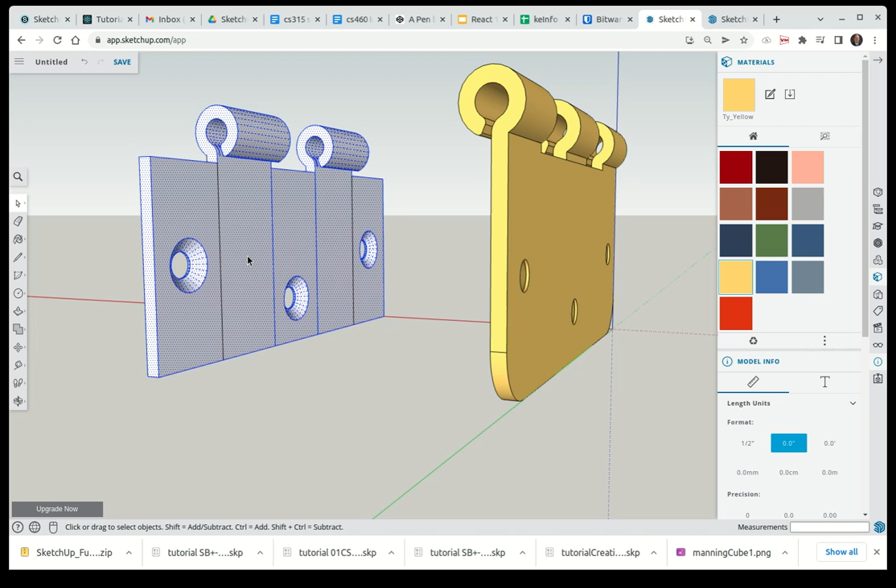Before I forget, let's go ahead and explode that whole thing so I can round the corners without that. So let's explode. It looks like it's all exploded. Alright, now let's go ahead and round the corners.

I need my little reference line up 35. That endpoint is going to be the reference for my rounded corner. Push that face through to that end and come back and remove lines.

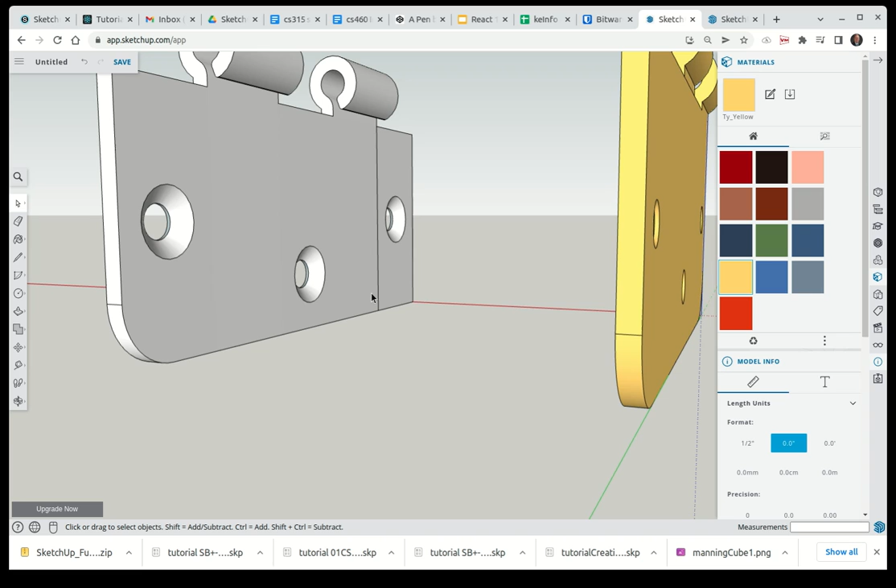And while I'm in the business of removing lines, on my way down, oops, let's go ahead and draw a line for my reference. Uh-oh, made a mistake. Oh, looks like it's remembering that midpoint. Oh, that's right, it is broken into pieces.

Let's go up 35. That becomes my center for my arc. Start straight down. And push that face through to there. And delete a few things.

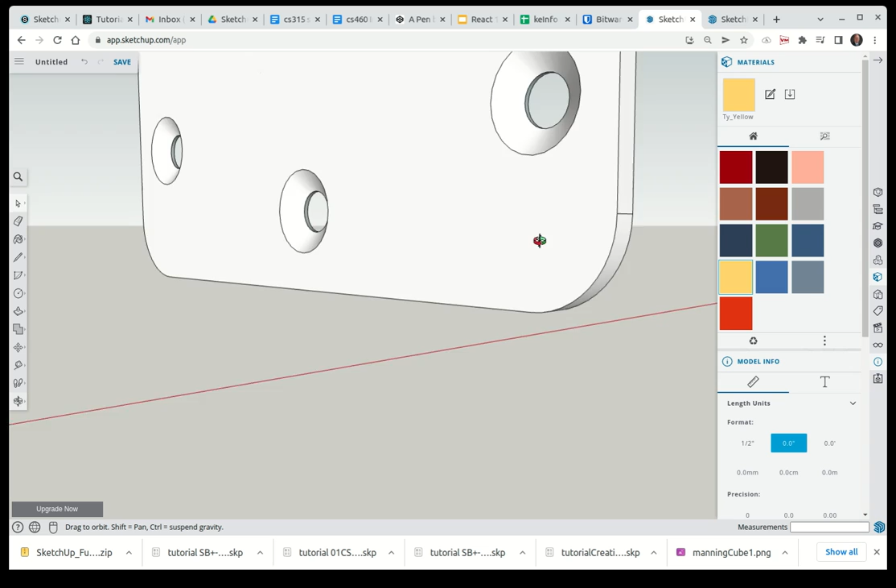And we'll regroup that part. Oops. Check for any extra lines. Let's get rid of these extra lines.

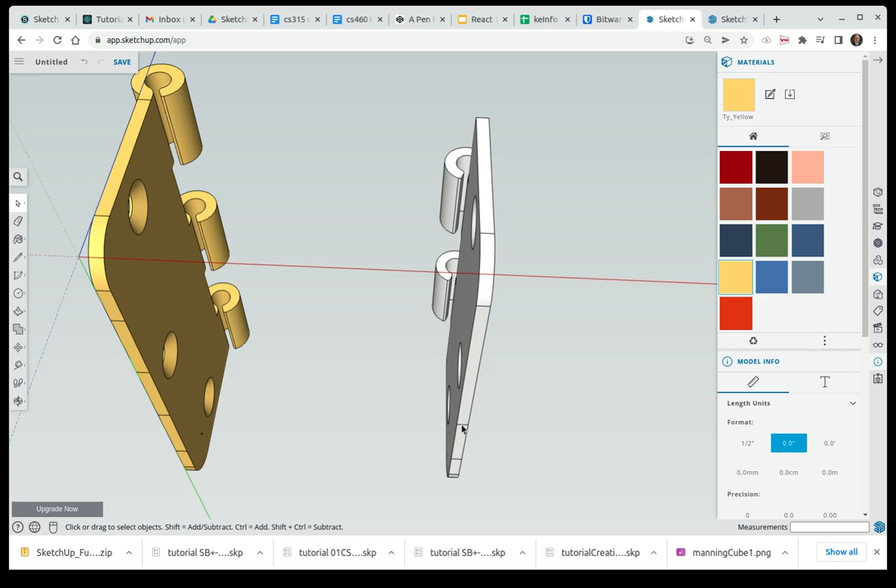This is a realistic hinge. Let's go ahead and group this part here. Oh, got a few extra lines here. Clean it up. Well, we'd like to have a decent cleanup here. Alright, I think we got extra lines.

Okay, let's select that. Group it. Color it. Ah, isn't that a lovely hinge?

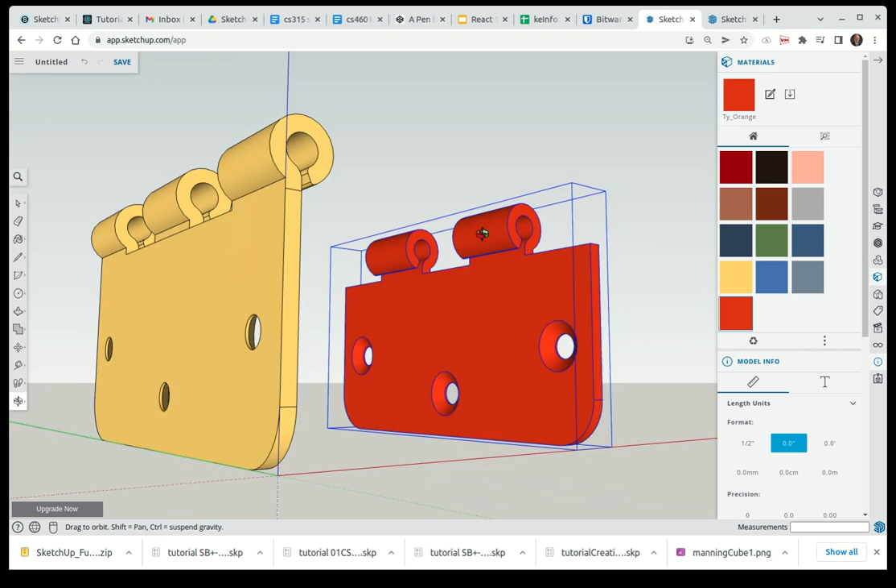Now let's bring them together and draw. Well, actually, let's draw our pin, and then we will bring them together. Now, in order to draw the pin, I need a center point here. So let's draw a line, and I can make a line across the center of that.

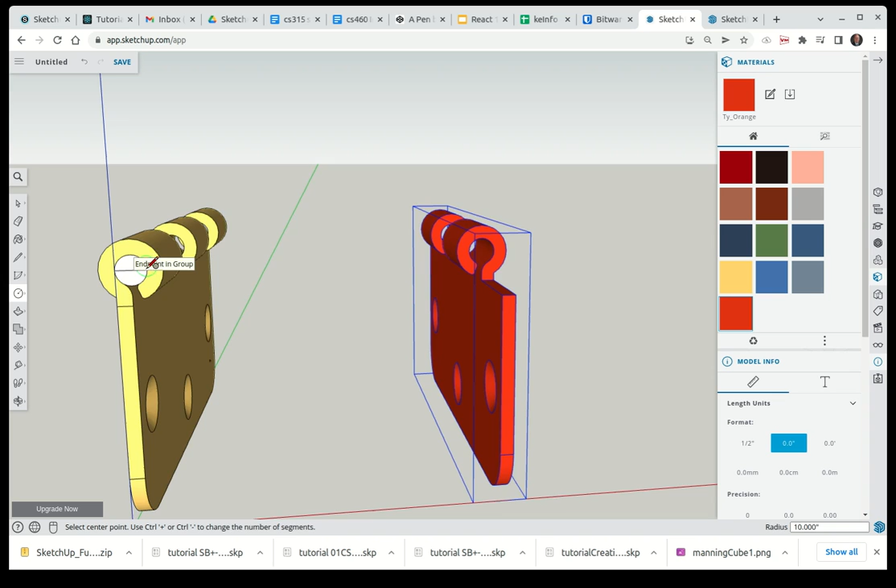Now I'll draw a circle, and I need to make sure it is on the red axis. Click for my center, and I'll come out to that edge. And let's get rid of that line. And now let's push that face through to that end and pull this face out a bit to make the

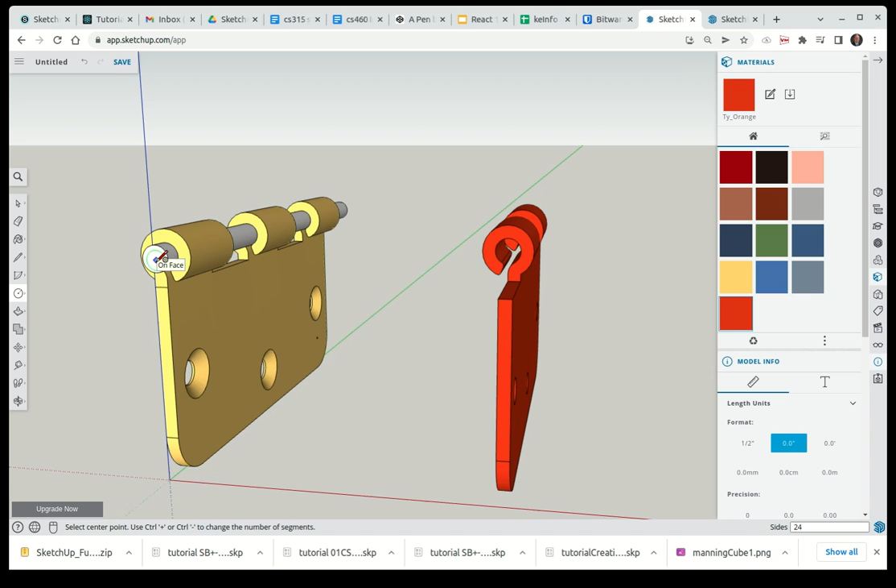top of this pin. Now let's go ahead and make another circle on the center of that circle. I need the center, there we go, and out, oops, and out to that edge. And now we'll push that face in a little bit for the head of my pin.

And now select a few lines to delete. Triple click. Let's group that. And let's color that. We'll make that. Let's see what color - we got a blue and red. Let's do blue.

And let's rotate around here and shorten our pin a little bit, it's sticking out a little too far. Let's push that face - I'll have to select that. I guess I have to triple click on it first. There we go. Now let's push that face, shorten that pin a little bit. Okay, and click off of that.

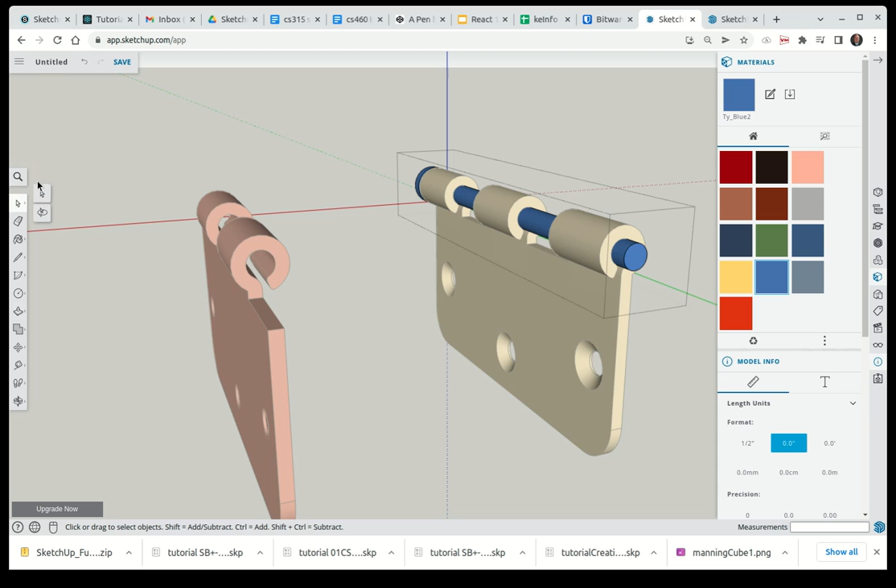Alright, let's bring them together and then rotate the hinge. So I can select any point. I want to move something. I'm going to move that one. That's the point I'm going to move. It's going to be on edge over here. Click. Now I want to rotate that.

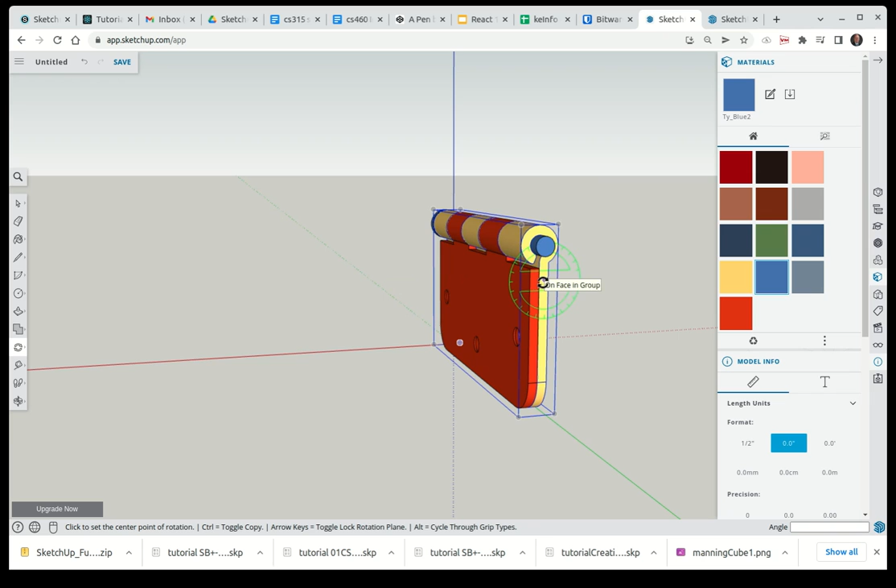Well, let's do a Q. Oh, it's already chosen the green axis. Let's rotate around the center of that pin. There we go. And no, I don't want to rotate the pin - I want to rotate this guy. Let's rotate him.

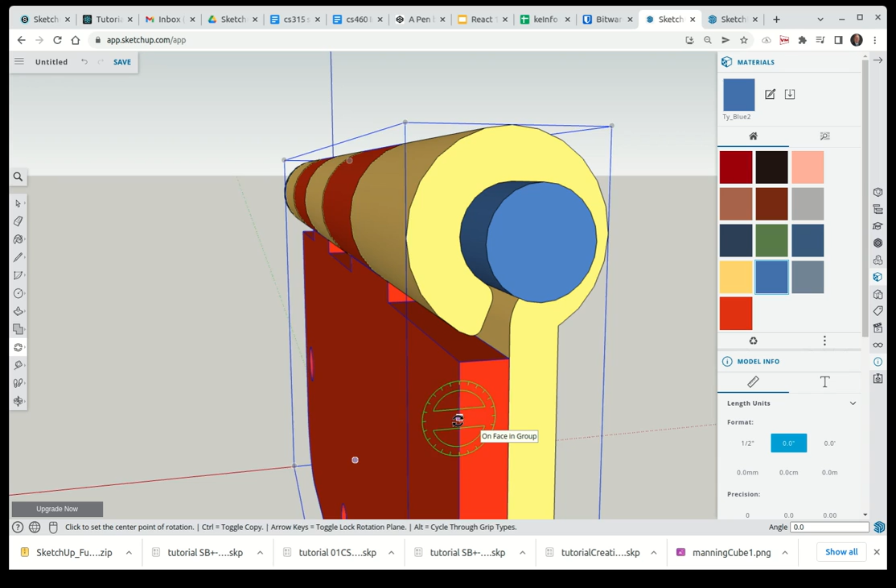Oh, maybe I have to have him selected for him to know to rotate. Huh? Let's do that. Select, rotate, and now the center of that. And I can choose any starting angle. And now, there we go. Now we're rotating him around.

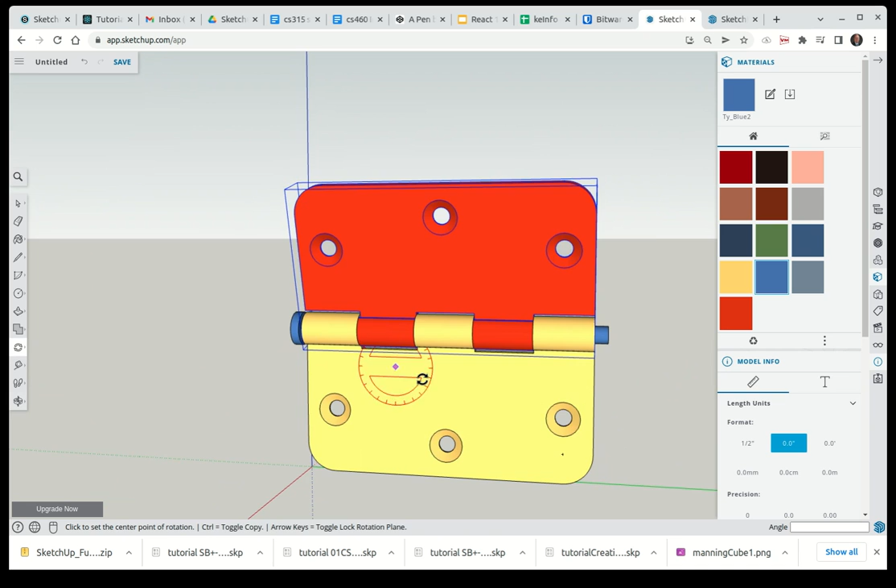And we have a realistic hinge. I think it's much better than cutting out pieces. It is to scale, and I think it much better matches what a real hinge looks like. And how long did that take? Oh, about half an hour - twice as long as the experts. But there you have it.